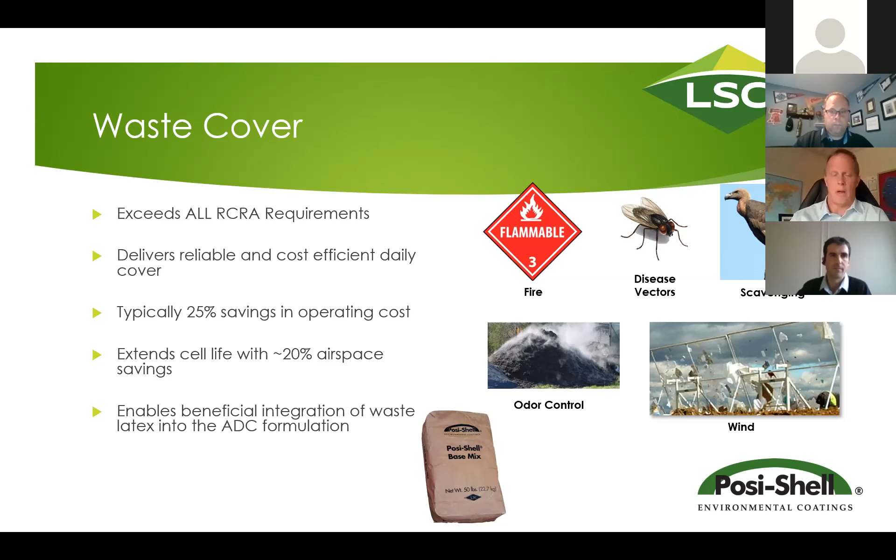It also has a lot of interesting benefits. We're creating a slurry on site, and many sites actually that collect waste latex paint will use that product in the Posi-Shell mixture as a way of recycling waste latex.

So that's typically the Posi-Shell for alternate daily cover. It's just going to be a product that comes in a bag. There's a piece of equipment on site, we mix this with water. It creates a very dense slurry that seals odors and also has a bit of odor filtration. The base chemistry or the base materials we use are very similar to materials used in kitty litter.

So from a technology standpoint, that's what's happening with our daily cover. Our daily cover products, we call them daily cover, but they could be out for longer than daily if required. However, we also, as you know, get into a lot of situations on a landfill, whether it's trash or soils that are very permeable, where odors are escaping in other situations.

So it's very simple with the Posi-Shell to alter the formulation to become much more durable than daily. We typically do this with something that's going to help harden the material. Most of the time, it's going to be a cement product.

So when we take Posi-Shell and add a durability enhancer, now we can make a coating that's going to last beyond a year with very minimal upkeep, very minimal maintenance.

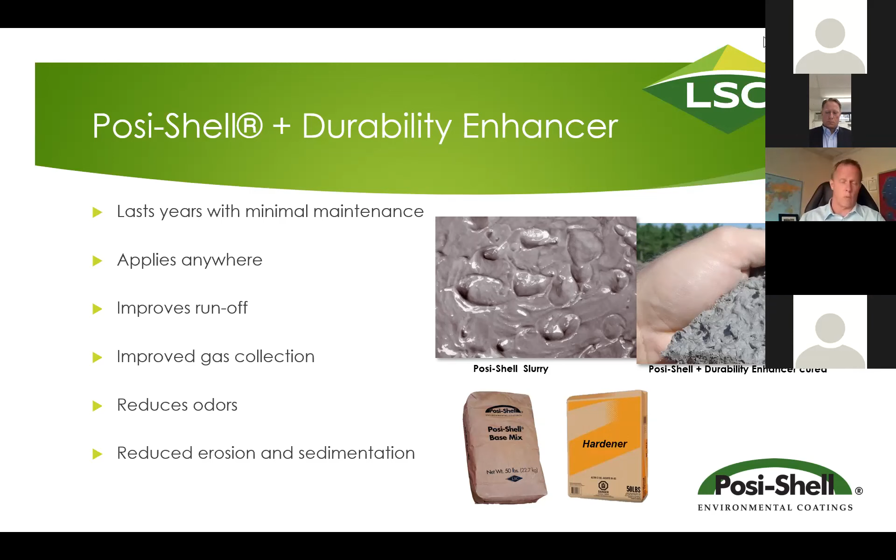The product improves runoff. We put a very thin coating of the material on various surfaces on a landfill, and in some cases we can now see rainwater come off at 95%. Water typically going into the landfill can be reduced dramatically. It's going to improve gas collection in situations where it allows you to suck on the gas system harder. Of course, it's going to reduce odors, and then it also is going to reduce erosion and sedimentation, keeping the soils where they belong.

So again, we have this daily cover version where every night, instead of using a 6-inch layer of soil, you can put Posi-Shell down. Then there's an intermediate version where, depending on the state and its requirements, we see intermediate cover ranging from 12 inches to 18 inches in some cases. And we have approvals in a number of states to replace some or all of those types of covers.

So again, we've been doing this for many years. And on the intermediate cover, very similarly, we can create a very durable product that can be out for a long time. There's airspace savings in intermediate cover as well. There's going to be all kinds of improvement with the gas and erosion and sedimentation in very dry climates, not so much maybe in New York State most of the time, but also windblown dust gets reduced dramatically.

We've already talked about the costs. One of the other really important things about Posi-Shell is when you need to move on to the next phase, whether that's hydroseeding or closure, the Posi-Shell doesn't have to be removed. It can simply be tracked in with a dozer. So if hydroseeding needs to occur on the slope, come in the following year and simply track over it. It's a mineral-based product that joins into the structure of the soil, and we have no issues whatsoever with vegetation growing with it.

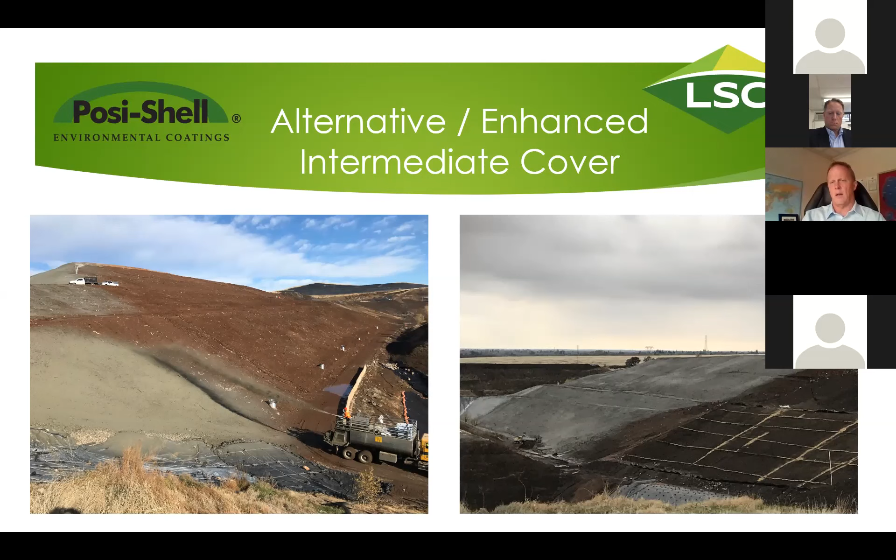So there are two types of intermediate cover in our opinion: what we've dubbed alternate intermediate cover and enhanced intermediate cover. Alternate intermediate cover is similar to alternate daily cover. These are situations where the product can be used completely in place of intermediate cover soils.

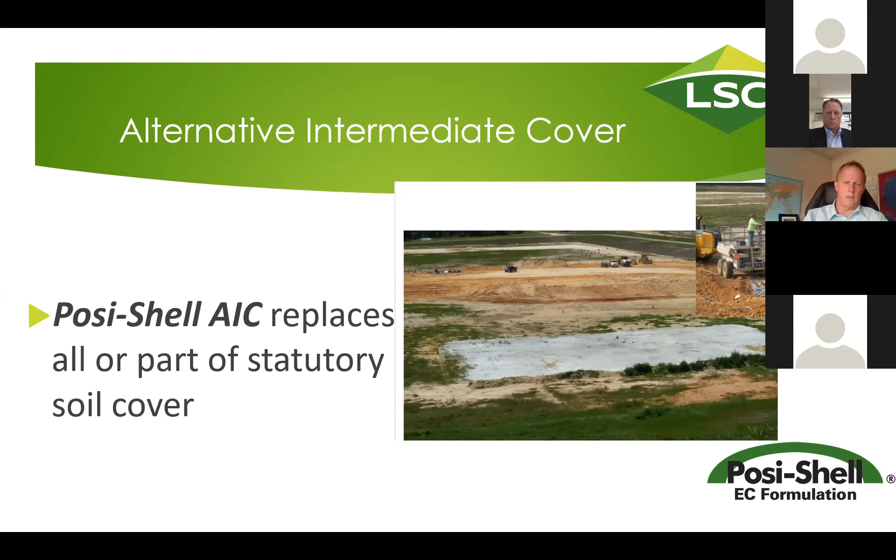We have approvals for this. This picture here is taken in Florida. We have approvals in South Carolina too, where the product can be left out much longer than overnight. It varies state to state - in some cases it's 30 days, some cases it's 180 days. We've had these things tested by third-party firms, and what they're checking for is what we're always looking for: odors, blowing litter. In the case of this one in Florida, there was a lot of work done on groundwater monitoring. We pass all these different tests. So that's alternate intermediate cover.

The other version is enhanced intermediate cover. This is where we're leaving the statutory intermediate cover in place, whether that's 12 inches or 18 inches - that varies. The reason we're doing this is we find throughout the country different types of soil structures. Poor soils in many places are very erodible from rainwater, and other soils are very permeable to gases escaping. Posi-Shell is used regularly and has been tested at many different sites, hundreds and hundreds of acres applied in this manner to help improve odor emissions at a landfill.

We take odor control very seriously because, in our opinion, a landfill manager has so many things they have to worry about every day, but to us, odors seem to be the top of that mountain. Where if odors cannot be controlled, these are the things we've seen shut landfills down, and none of us want that to happen. We put this slide in here because we take this very seriously.

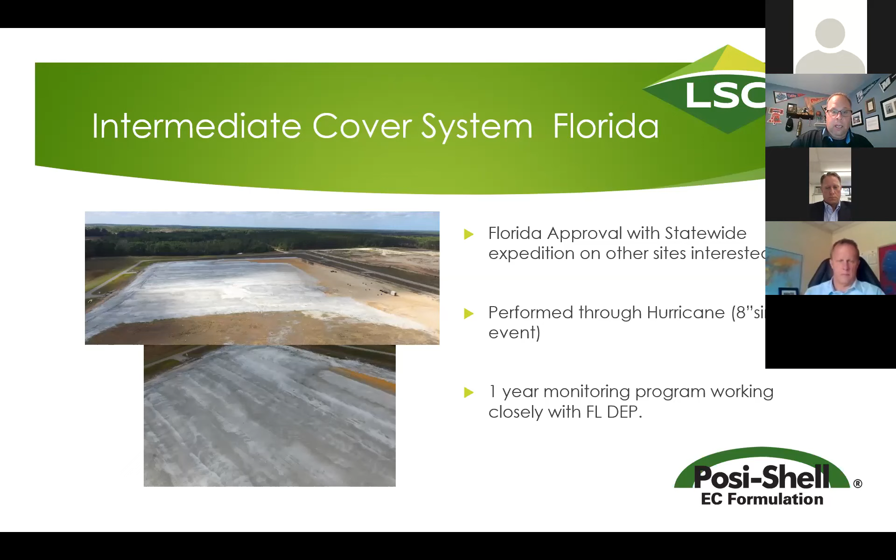Thank you, Joel. So what I'm going to do is go over three little projects and case studies that we've done using Posi-Shell for an intermediate cover / odor control application. Like Joel mentioned earlier, in the state of Florida we have preliminary approvals statewide - it's called an expeditious permit modification. We applied a little over 30, almost 30 acres so far at Hernando County.

Some of the bigger benefits, in our opinion, was the reduced leachate generation, because you're shedding that environmental load off instead of it permeating through and getting collected by your collection system. And then, as Joel mentioned earlier, the gas collection provides a much tighter seal and allows that landfill gas collection to draw a little more efficiently. Based on their third-party projections through their engineering firm, they were looking at a little over $10 million in savings over the project life.

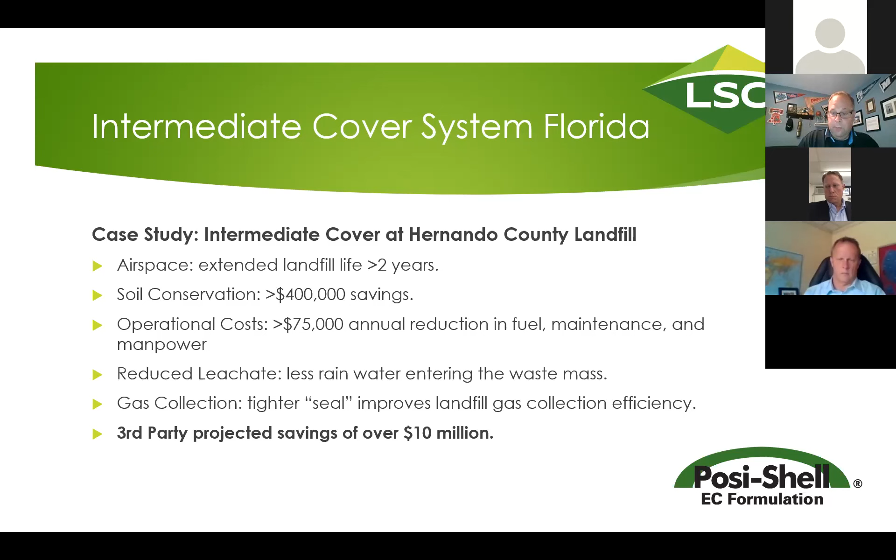Another pretty large project we worked on was a private facility in California, outside of Greater Los Angeles. They had some major issues with odor, and were looking for something to seal things in and stem that. Once again, very high permeability soil, and they were actually under a consent decree.

So what we did is a little over 37 acres at the time of the project since 2017, minimizing airborne dust where it was applied, particularly on the slope areas. And as I mentioned earlier, it improved the barrier against ambient air being drawn in. The other thing to keep in mind is that when you draw on that system a little harder and get ambient oxygen, it could lead to some combustion issues.

So that's another thing we found over the years, kind of an unintended benefit, is that you're allowed to draw a little more on that system without worrying about combustion issues. It provided an interim cover that's very easily integrated into the vegetative cover when it needs to be removed, versus the other option of putting a geotextile down and having to peel that back, which is very labor intensive.

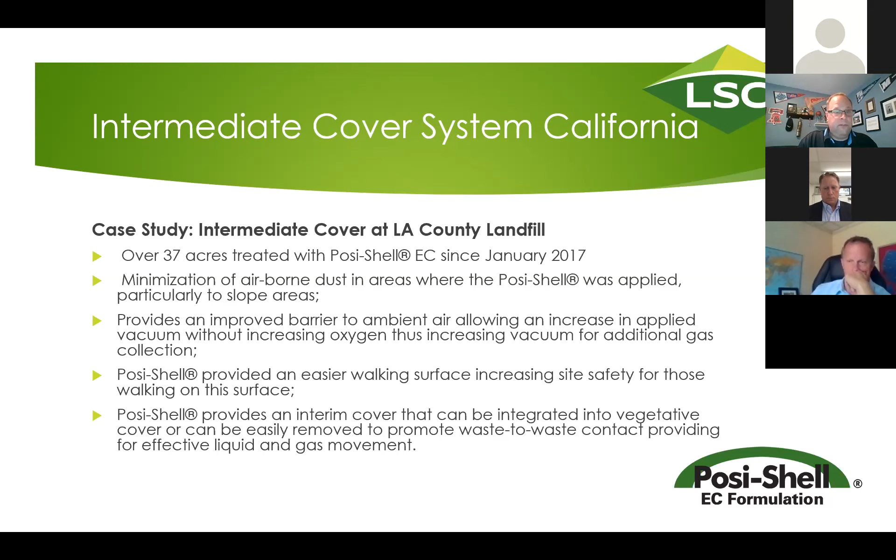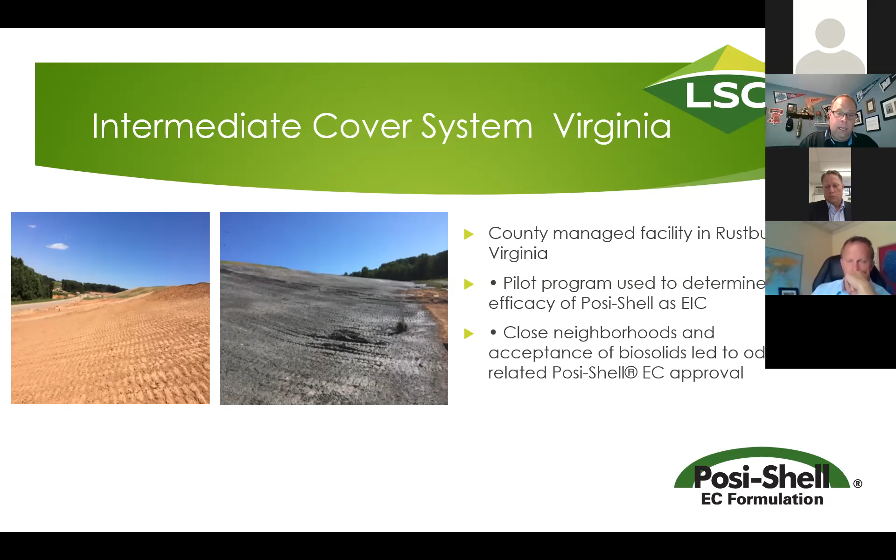One of the landfills I personally worked on was a facility outside of Rustburg, Virginia, near Lynchburg. This was a facility that didn't have an active gas collection system at the time, and they were getting some odor issues. So what we did is put a pretty robust formulation of Posi-Shell down, a little over 5 acres.

As we were putting this down, they actually installed 9 vertical wells and tied it together to a portable trailer-mounted gas collection system on a vacuum. They had their engineering firm monitor this very closely. The surface methane concentrations showed a little over a 20% reduction overall, and about a 44% reduction where the Posi-Shell was applied versus the control area that was not applied.

The surface H2S concentrations showed a little over 56% reduction, with a median reduction of 50% across all 9 wells. And of course, they had qualitative data that supported that information, and they've been very happy. Since then, they've actually upgraded their system to a more of a live system that's been installed. So the gist is: an improved gas extraction system will dramatically reduce odors.

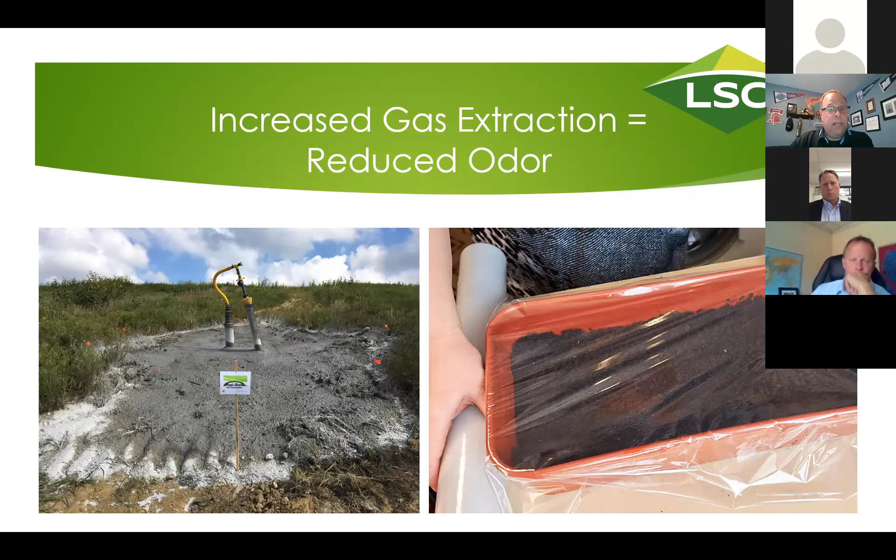Some other applications we're able to do are around wellheads. That's kind of a path of least resistance for the gas. We do a great job sealing everything in, but around the wellheads is usually an area where we start to see some hits. So a lot of our customers have sprayed this around their wellheads to seal things in. During independent testing we've been doing over the years, we see about a 93% reduction in VOCs in areas that have been applied with our product.

Hey Ben. Yes sir. Go back that one slide, just so the group, if you don't recognize that device, that's called a flux chamber. It's used for measuring odor emissions and VOC emissions out of a landfill, but this is a slope of a landfill.

Actually, this is in Hong Kong, and what they'll do is get a baseline reading on a slope that doesn't have the product on it, and then put it on the slope that does. This particular one is our Posi-Shell, and yeah, they see about a 93% difference in what's coming out there. The brown around it is just a wet Posi-Shell used to seal it off, so they make sure the emissions are only coming from underneath that device.

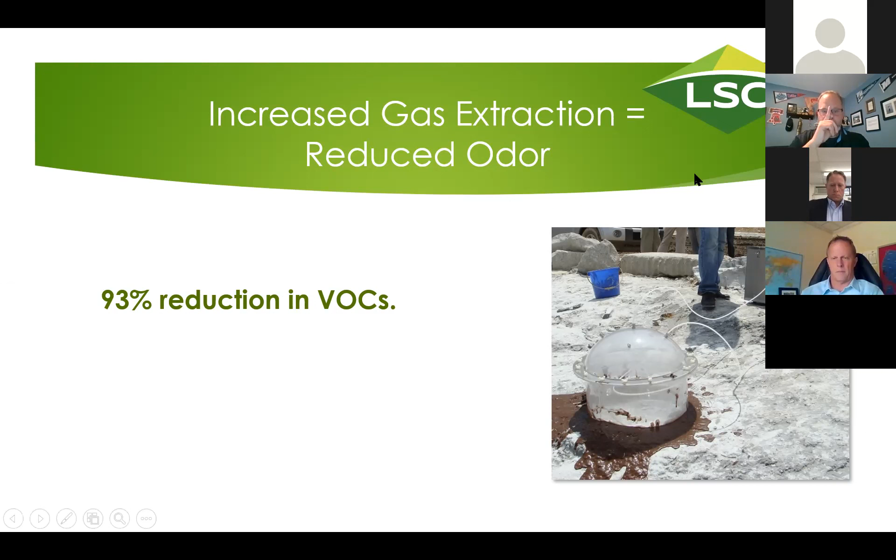The other thing I should have mentioned earlier is that there's always a concern when you're drawing in more ambient oxygen, especially if your system is like a gas to energy plant. You need to balance that oxygen, because when you draw a little harder, it can throw those numbers off a bit. There's a concern when they're at the actual plant about getting too much oxygen versus what they normally get. That's just another thing I should have thrown in there.

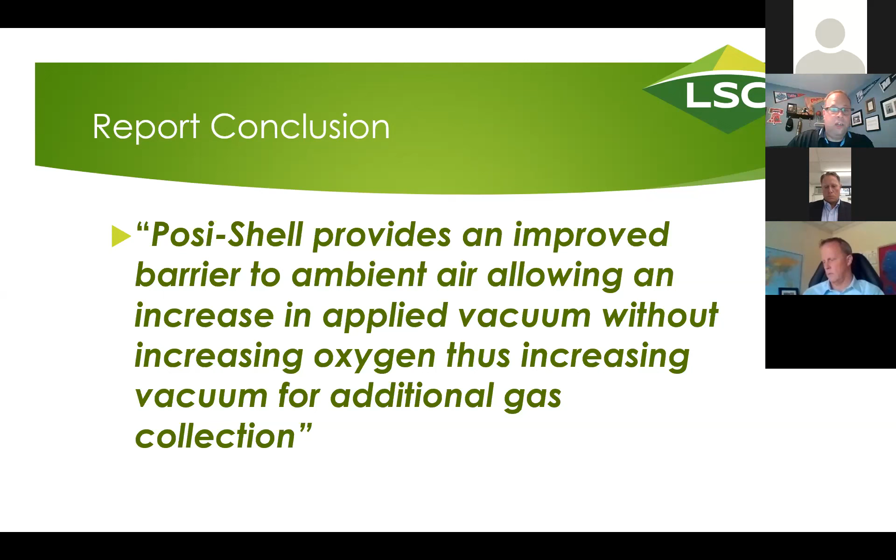Some other pictures of facilities where we sprayed around the wellheads. Some of the testing we've done: well 1 is applied with Posi-Shell, and well 2 in red is bare soil. Over time you'll see a pretty dramatic decrease in emissions where we apply the EC4 Posi-Shell around the wellheads versus the bare soil.

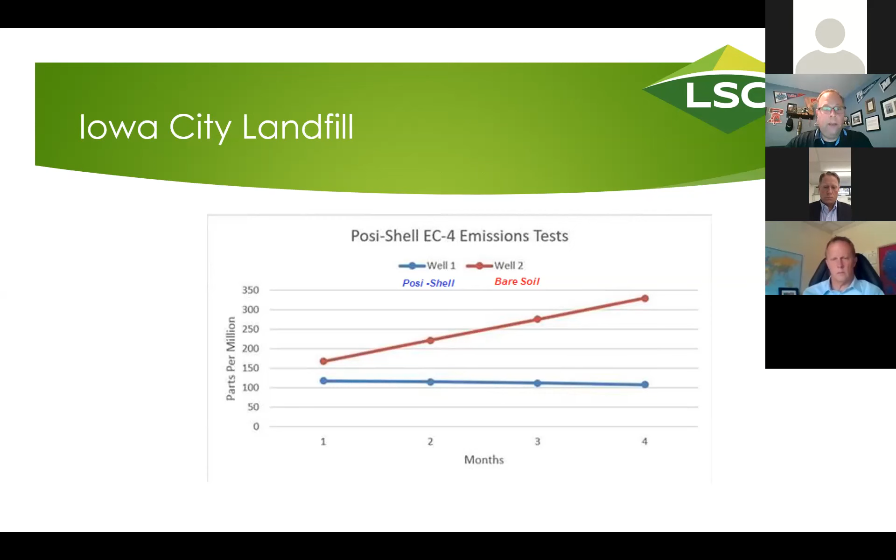Another thing I want to mention is we have another standalone product called Odor-Shell. It's a variation of Posi-Shell with very highly concentrated odor counteractants in it. We leverage a 3-pronged approach of sealing, filtering, and neutralizing odors on contact, mainly used on piles of special waste and working face odors way above and beyond what we'd consider normal. Not necessarily great for slopes -- that's more of our EC formulation -- but wanted to throw that out there for working face odors and special waste odors.

Like I said, it's a variation of our Posi-Shell product infused with neutralizers. It adheres to any surface in wet or cured form. We can also mix in a durability enhancer to extend that somewhat and give you up to a year of performance.

So this is a slide of some of the testing we've done, like Joel mentioned earlier, with our flux chamber testing. We usually see anywhere between 93 to 98% reduction in VOCs.

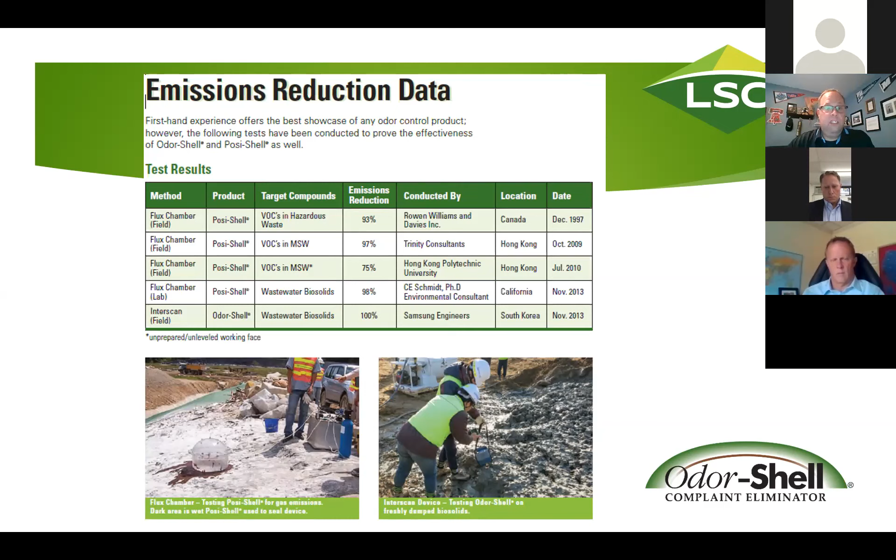So I'm going to turn this back over to Joel to talk a little bit about our solar spark vent flares. How much time do we have left? This is our last piece, but just give me an idea -- 5 minutes. Okay, so we'll just go through this rapidly.

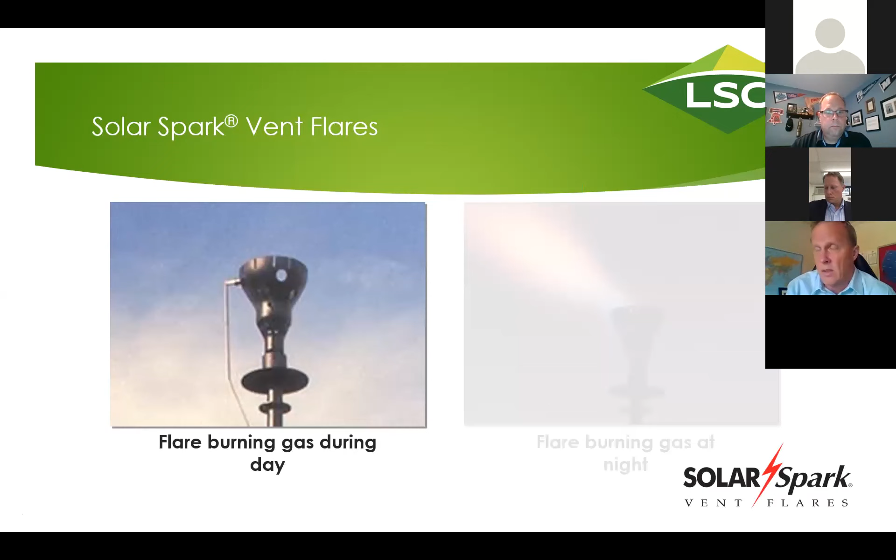Talking about landfill odors -- my long experience doing this is I've always told people, if I can smell the landfill a mile away when I'm driving up to it, and we've all run into cases like that, that's gas. The odor is going to emit from a couple places: the working face, and gas emitting that's not being collected or destroyed properly. My experience is these gas odors are going to be the ones that travel much further. The working face odors, to me, don't travel that far.

So if you have a good source of covering the working face, you're going to take care of that. However, landfill gas is going to come out of the landfill somehow. And I get passionate about this because I don't care what you cover the landfill with, the gas is going to come out. So we developed many years ago a product that frankly we thought would eventually go away.

So we have these solar spark vent flares. They're designed to be placed on the vent. We'll show you some pictures a little later showing they can actually be installed just about anywhere, in the face of active gas systems and waste to energy plants, which we think is a great thing. We thought these flares would see their day 20 years ago and then they would go away. However, we still place a lot of these flares because what we've learned is gas in landfills can be very tricky.

And frankly, it's a massive odor source. So where we find ourselves placing these flares is: number one, in situations where gas collection is not economically feasible; number two, where a gas collection system might not be completely connected; and number three, where a gas system might not be functioning properly.

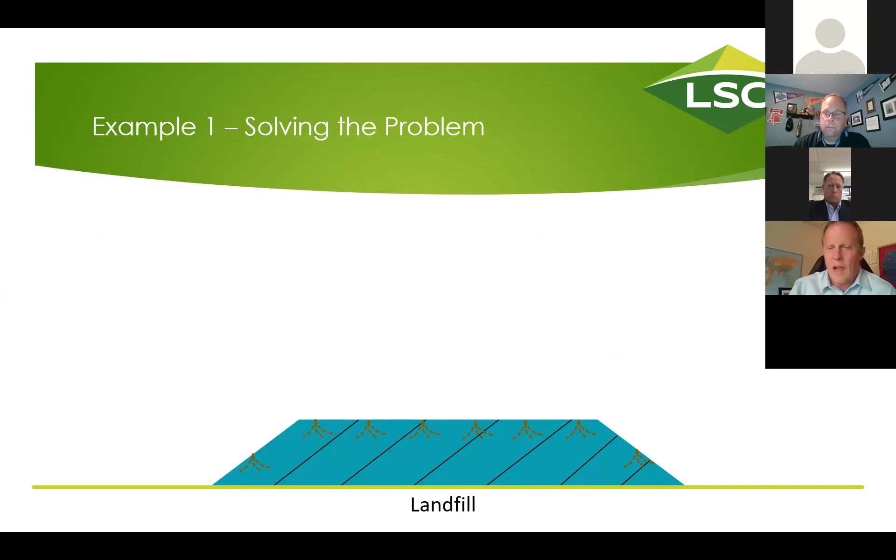These slides were made for a presentation we did in Asia, so the graphics here are designed the way they are because I knew we were dealing with a bit of a language barrier.

So the first situation here is solving the problem where a gas system might not be feasible. We have many customers that just place these solar spark vent flares on the wells that are in place. They can be installed in an hour, they're very economical, and they're rated at 98% efficiency. The design of the flare head you saw earlier was developed at the City of Albany landfill many years ago. They function in wind. The sparking system, if it happens to go out, which happens very rarely, it's on a constant solar spark.

So they're very reliable, there's thousands of these flares throughout the world. So we have the situation where an active gas system might not be feasible.

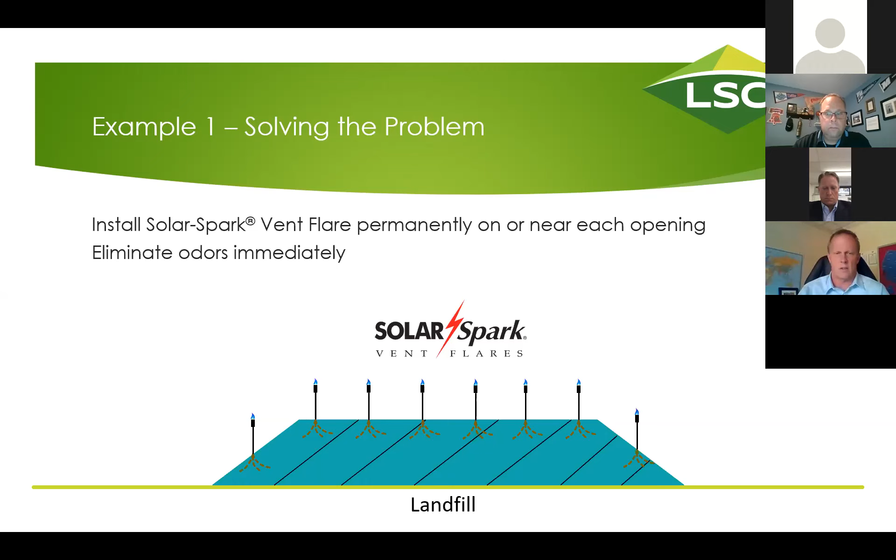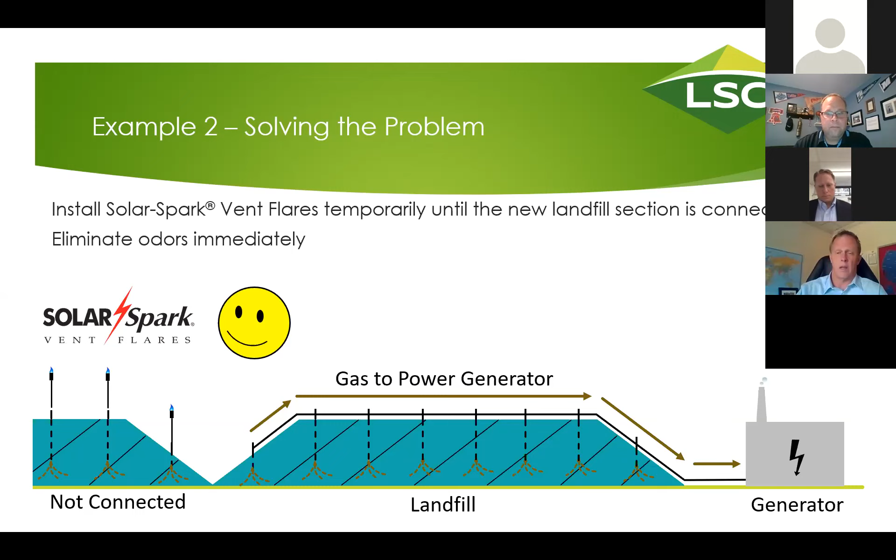That was for international. So in other situations, there's possibly a system where there is an active gas system, waste to energy, but what we've run into many times is parts of the system aren't connected. The picture you'll see here in a moment is from a large customer operated by Veolia in Hong Kong. They have active gas collection, but they don't drill the vertical wells until the new cell is completed. So what they've done is placed our flares on the wells, and they have flares they can move around in the current cell until it's connected.

So again, they're able to destroy the gas and destroy the odors. This is a picture at a very large facility in Hong Kong. We took this at night intentionally - there's 100,000 people in those 54-story apartment buildings looking down on this landfill. So they're very serious about odor control there, and they utilize these flares regularly.

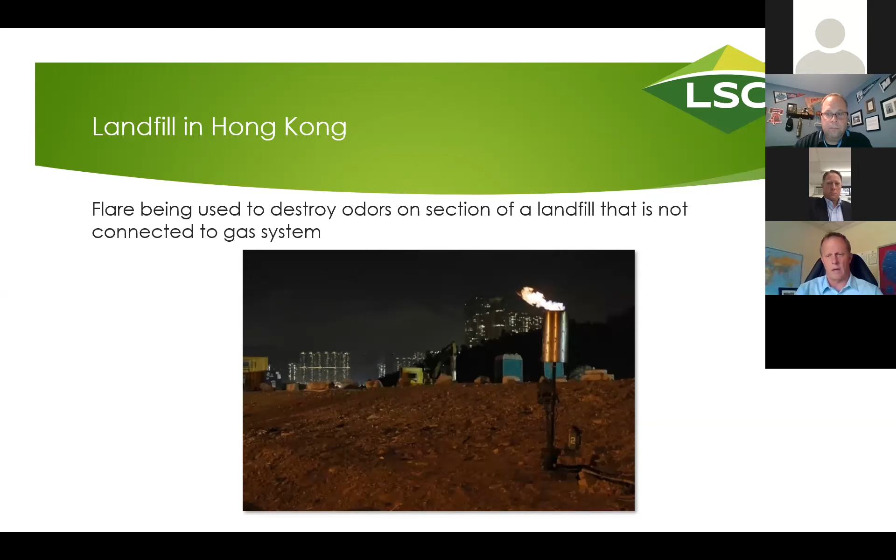And then the last scenario, which happens fairly regularly actually in Asia, is where the monsoon rains come and people have a gas system in place. However, the landfill gets too much water in it, and the wells don't work properly because they get blocked and watered out. So what happens in cases like this is, again, we've been able to help people install these flares.

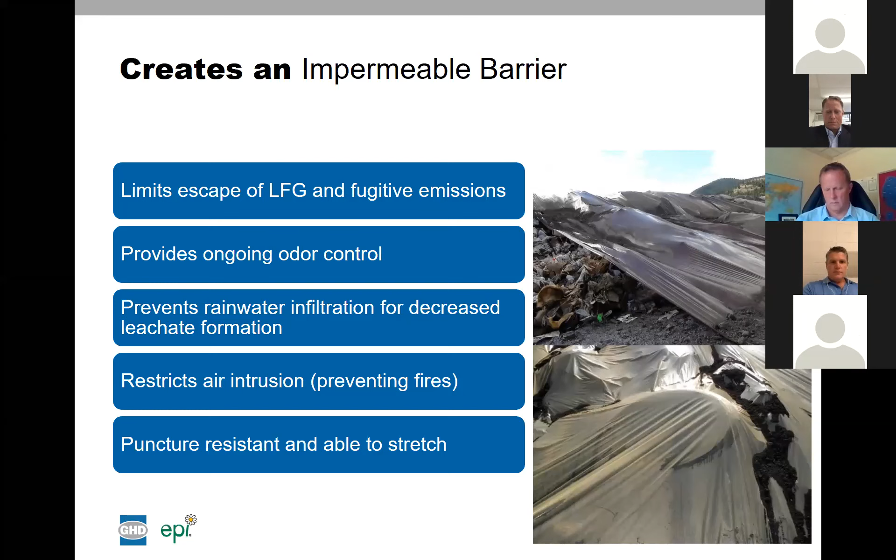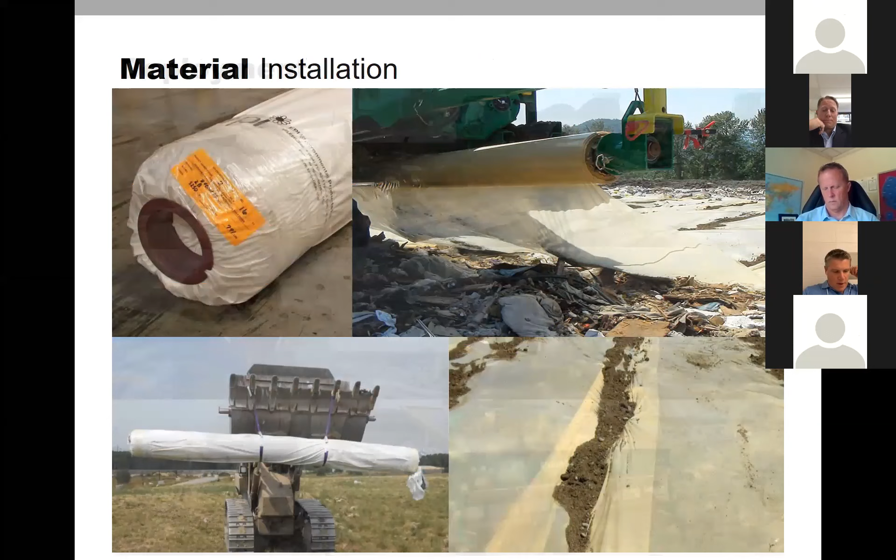It also limits the escape of landfill gas and fugitive emissions, provides ongoing odor control, prevents rainwater infiltration as we discussed, and also restricts air intrusion - so you don't get any oxygen in. If you have a fire or something smoldering, it'll help smother that out. It's puncture resistant and also stretches over odd-sized items in the landfill as you cover.

As far as the material and installation goes, we discussed the film itself. It comes on a roll, 18 foot wide, covering approximately 93,500 square feet of area. You do have to account for about a 10% overlap, so you back 10% out of that 93,500, and that'll give you the square footage coverage.

As we discussed, there are basically 3 different types of deployment devices. The flagship deployer is the ECD-800, a self-propelled rubber track unit. It utilizes a Morooka, which if you're familiar with that in the landfill industry, a lot of times Morookas are utilized as dump trucks to get in and out of soft areas. So it has really low ground pressure, and that allows it to operate over the top of the waste effectively.

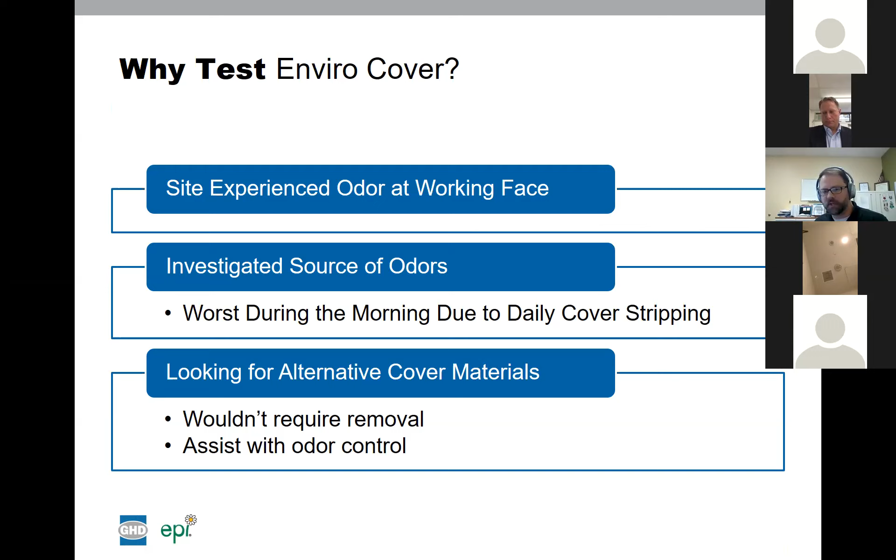One of the findings was that the odors at the working face were strongest in the morning. After more discussion, the odors were determined to be due to the process of stripping the daily soil cover and exposing the waste from the previous day. This finding caused the site to look into what sort of ADC materials might exist that wouldn't require removal every morning and could assist with controlling the odors at the working face.

So next we'll discuss the types of materials that were researched. The client reviewed and tested various soil cover types to see if they had any effect on odors. However, this was not an ideal solution as it didn't really provide an advantage. Operations would still need to perform soil stripping to start each day.

Next, they looked into traditional tarps. These tarps had the benefits of being easily installed, typically worked in all weather conditions, and controlled litter and vectors. However, they did not really assist with the site's odor issues.

Another approach they researched was spray-on cover applications. After speaking with some of the operators, they explained that they generally found it difficult to get adequate coverage over the entire working face, and that the application didn't consistently work well under all weather conditions, especially during periods that were particularly cold or wet.

And the last option was EnviroCover, which we'll discuss more.

So based on the information supplied by EPI to the client, EnviroCover sounded like a potential solution for the site. A big selling point was that removal of the application was not required, so the material would be mechanically destroyed on the subsequent placement of waste. Therefore, it would not impede the movement of landfill gas or any leachate.

However, the site wanted to make sure that they weren't creating any other issues by introducing impermeable layers within the waste. The material is resistant to tearing and puncturing as it has high tensile strength and elongation, but it needed to function as designed under typical working face conditions, which can vary on a daily basis.

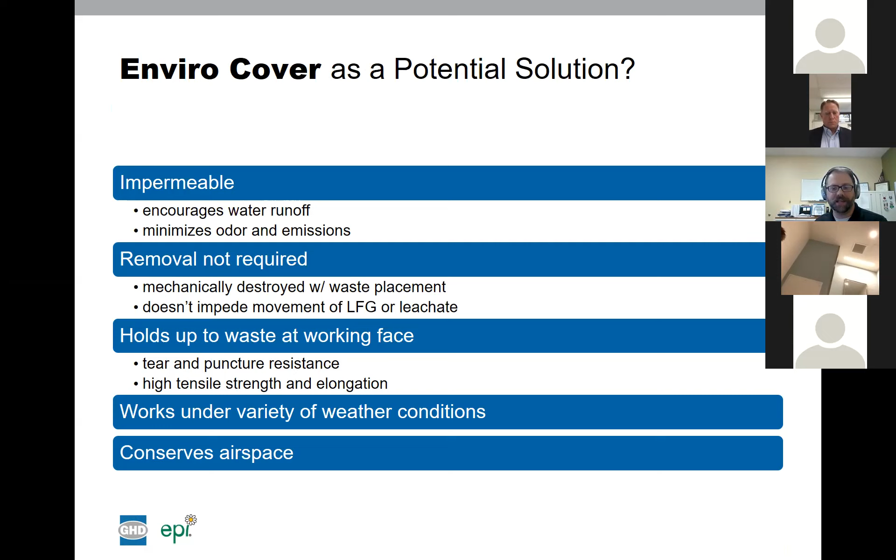So after considering all of EnviroCover's details, the site wanted to conduct a pilot test to make sure that the product would work as planned.

The site submitted an application to the state regulators to conduct initial pilot testing in December 2018. The state was intrigued by the technology and its ability to potentially reduce odors, so it was approved initially for a 30-day trial period.

EPI made sure to be on site for the study in order to assist in any way possible. After all, it was a new type of cover system for the client, so they really wanted to make sure that they got a good sense of the product and that it was being implemented properly.

The client worked with EPI and was able to rent the equipment from them for the pilot test. This allowed the client to spend a limited upfront cost other than the cost of the actual material being used. And it should be noted that while cost is obviously a factor and was a consideration by the facility, cost consideration is not something that was included as part of this evaluation.

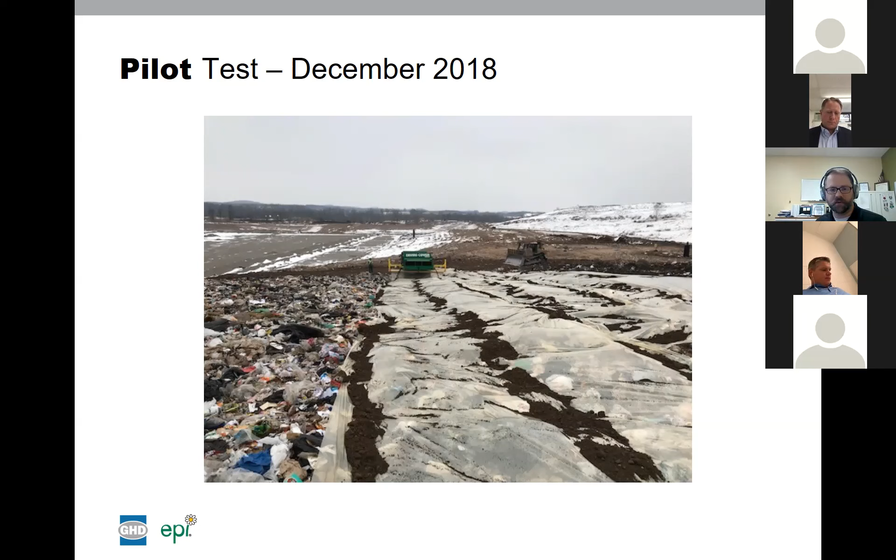So as you can see here, here's some of the pictures from the initial pilot test in the winter of December 2018 and January 2019. The EnviroCover is in place and ballasted along the edges by soil.

Throughout the initial pilot testing, the study was subject to several different weather conditions, including both wet and snowy weather, extreme cold, and windy weather. As advertised, the material could be deployed under these harsh weather conditions and stayed in place as planned.

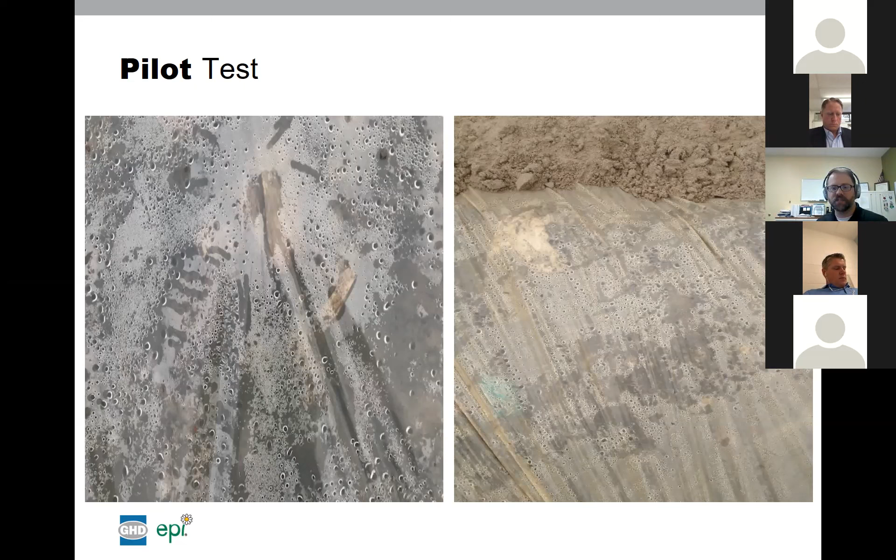It should be noted that surface emission monitoring of the working face was not performed as part of this case study. Therefore, while there was anecdotal evidence in the reduction of emissions through observations made, no actual testing was performed to confirm this.

Odor intensity is determined using ASTM E544. Odor intensity refers to the overall strength of the perceived odor. The more intense the odor, the more likely an individual will react negatively to it.

Even pleasant odors can be too much at high intensities, and conversely, offensive odors can be very annoying at low intensities. A common example is when someone is wearing an excessive amount of cologne or perfume. Typically those are pleasant smells, but in those cases it becomes just way too intense for any person.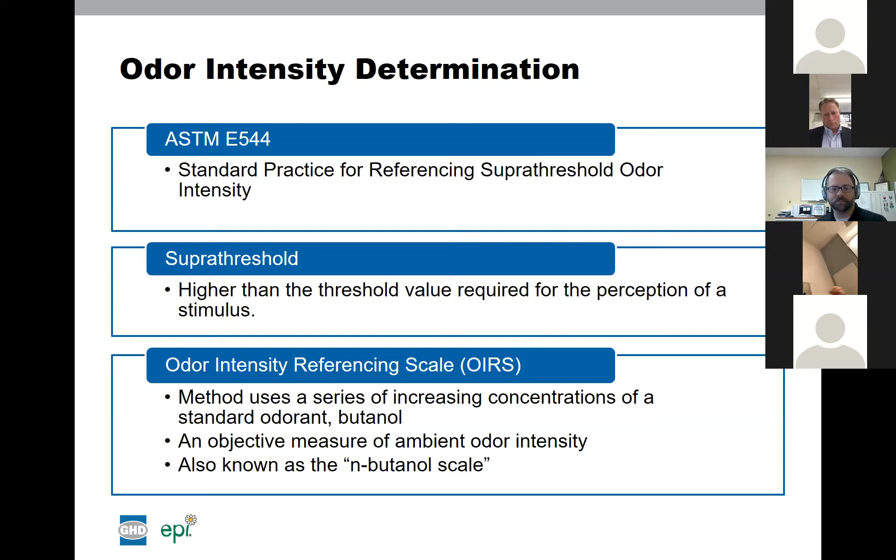When performing an odor intensity test, the field observation is expressed in parts per million of N-butanol, hence the informal designation of this as the N-butanol scale. This scale helps classify odor into levels of intensity ranging from 0 to 8.

For this study, site personnel were trained, as well as myself, two other members of GHD, personnel from another consulting firm, and even some members of a local community group.

Not all the smells they tested us with were pleasant or on the lower end of the scale. I secretly think they enjoyed watching us wince and gasp for air while we were being trained. But after taking the training and performing some assessments, it was impressive how a group of people with varying degrees of sense of smell could end up determining reasonably similar results.

As part of a larger effort related to odor assessment and mitigation, personnel were on site to perform odor intensity readings in January 2019.

The evening prior to the odor intensity testing, only part of the working face was covered using EnviroCover, while the remaining area was covered with soil. This allowed the two areas to be compared the next morning.

Prior to starting operations that morning, odor intensity readings were taken. For the area where soil cover was placed, personnel determined that readings ranged from 0.5 to 1.0. In the area of the EnviroCover, only a trace odor was perceptible to the personnel present.

As a check, an 8 by 10 foot section of the EnviroCover was cut open in order to perform a reading. Immediately, the odor intensity spiked from trace amounts to 1.0. After 15 minutes, the intensity backed down to 0.5, and then returned to similarly background intensity shortly thereafter as the odor dissipated. Due to these results, it was concluded that EnviroCover does have an ability to limit odors and likely any associated fugitive emissions.

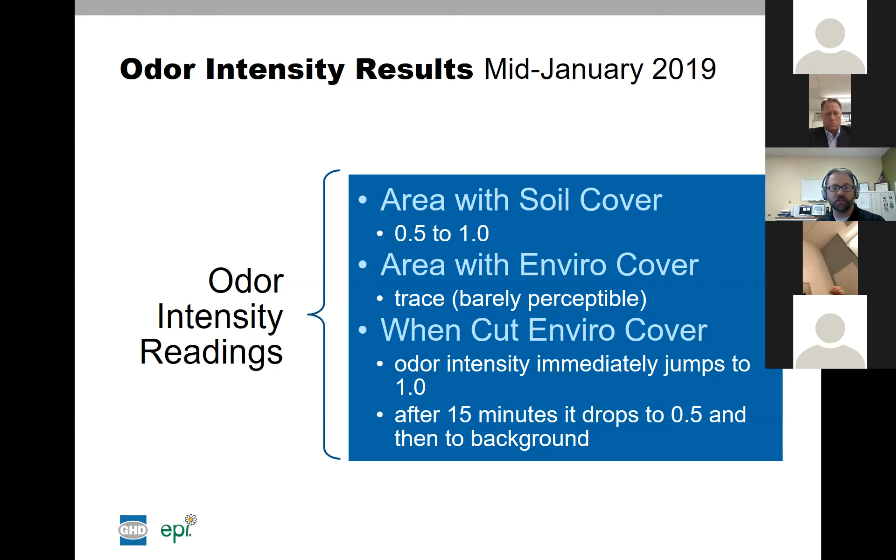Based on the initial results, the site wanted to extend the trial period to be sure they considered performance during seasonal variations and long-term operational aspects. The state regulators also wanted to get a chance to see it in use and evaluate the effect on odor control over a longer period.

They also wanted to see if use of the material had any impact on the number of odor complaints received. Therefore, the initial pilot test was extended from 30 days to 6 months. Due to the fact that the findings from the pilot test were promising, the site submitted an application for EnviroCover to be added to their approved list of ADCs, and that was approved by the state. The site has been using the material as part of their regular operations, and the results have been positive.

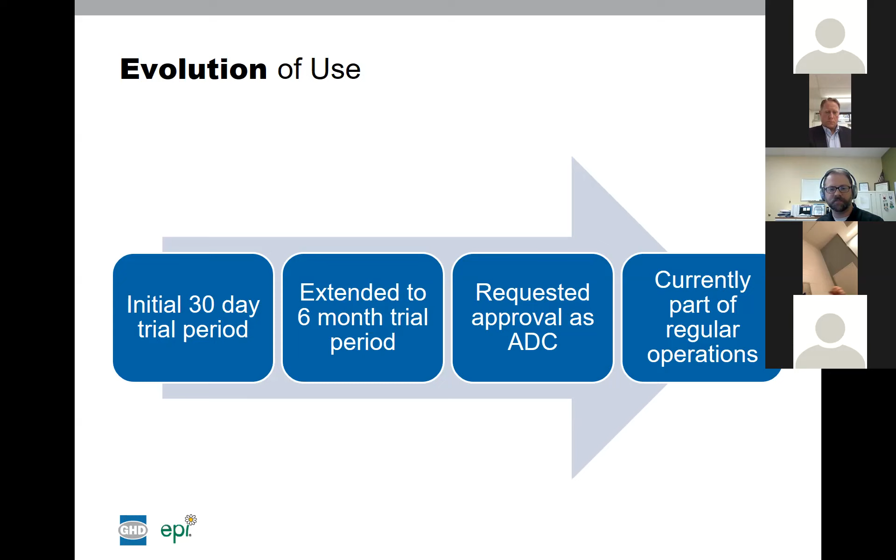Some takeaways: unfortunately, we are not aware of any single cover system that will work best for every application. If you have an operational issue, we recommend researching potential ADC applications that may be able to assist your facility. This will allow you to determine what works best for you.

Keep in mind that what works at one site, or what one operator may really like and prefer, may not be the best application for your site. I will say though that most vendors are completely willing to help you test their material at your site, by either renting the equipment to you or something similar, to make sure it will perform up to your expectations.

Sometimes the products do really work as well as advertised and can be part of the solution for those hard to solve operational issues. This is especially the case if odors due to cover stripping are an issue at your site. If so, EnviroCover may be a good alternative to typical cover materials, considering it performed positively during our study.

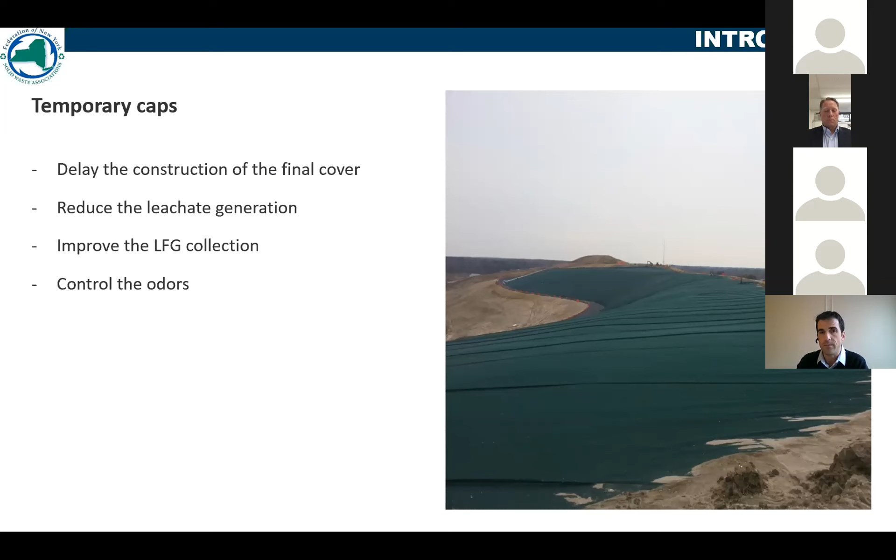The issues you may have with temporary caps is the ballast of the exposed geomembrane. If the geomembrane is not well ballasted, you may have uplift. The traditional way to ballast the geomembrane is to put a lot of sandbags to maintain it in place, and Elliot will show you an enhanced way to ballast the geomembrane and get rid of the sandbags.

On my part, I will talk about a second issue you may have with temporary caps: the efficient collection of the LFG.

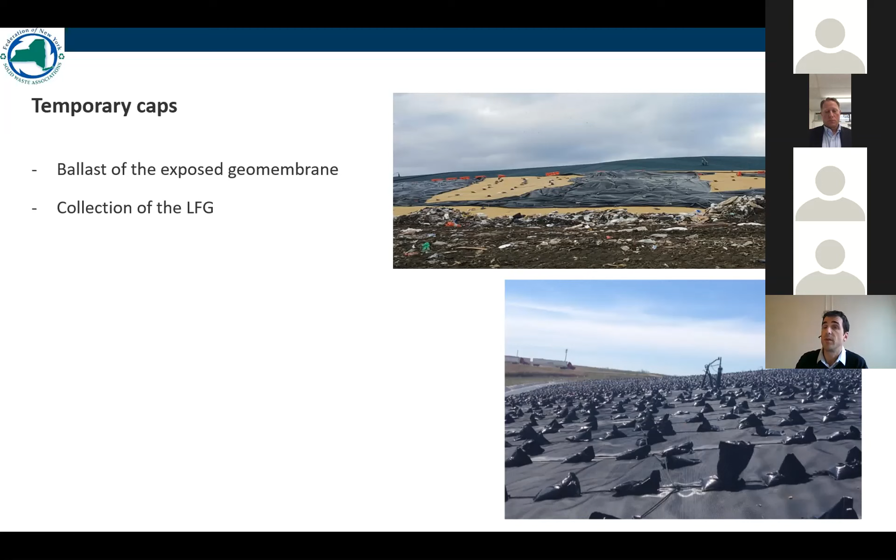Most of the time, you will have perforated pipes under the geomembrane, placed every 30-40 feet, and you may not be able to catch all the LFG with that system. So first, let me introduce a way to collect the LFG under the geomembrane using a multilinear drainage geocomposite.

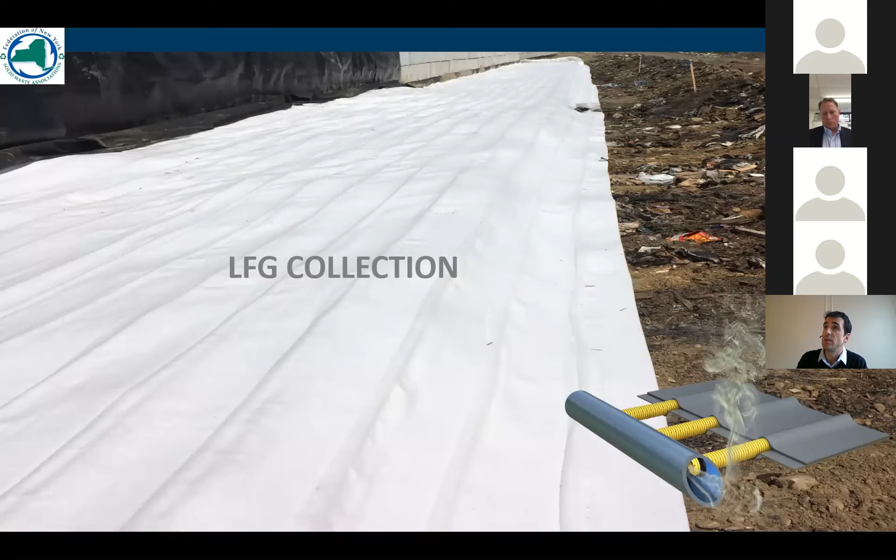The multilinear drainage geocomposite is a drainage geocomposite with drainage conduits regularly spaced between two geotextiles. In our case, the drainage conduits are perforated polypropylene mini pipes.

They are placed in the product every 10, 20, 40, or 80 inches depending on the flow capacity you need, and the diameter of the mini pipe may be 20 or 25 millimeters. The product is delivered in rolls, 13.1 feet wide, 246 feet long.

We can play with the spacing of the mini pipes, and the geotextile layers can go from 4 ounces per square yard to 60 ounces per square yard if you need a product with really high mechanical properties. It is used for water drainage, leachate collection, and in our case for gas collection.

The main advantage of the product is that the mini pipes have high compressive resistance. The pipe stiffness at 5% deflection is over 435 psi. The transmissivity of the product, depending on the number of mini pipes, can reach 4 × 10⁻³.

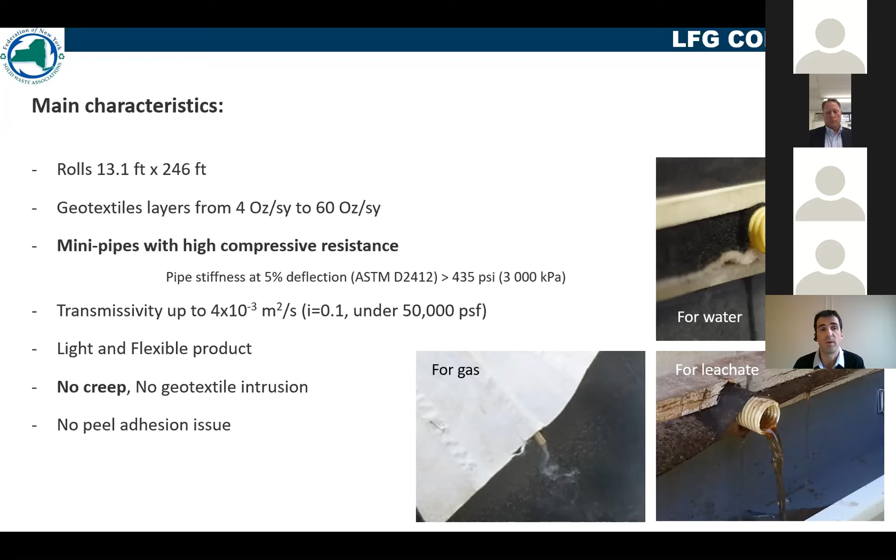Even though the product is light and flexible, it will keep its drainage capacity over time, because it won't suffer creep in compression nor geotextile intrusion.

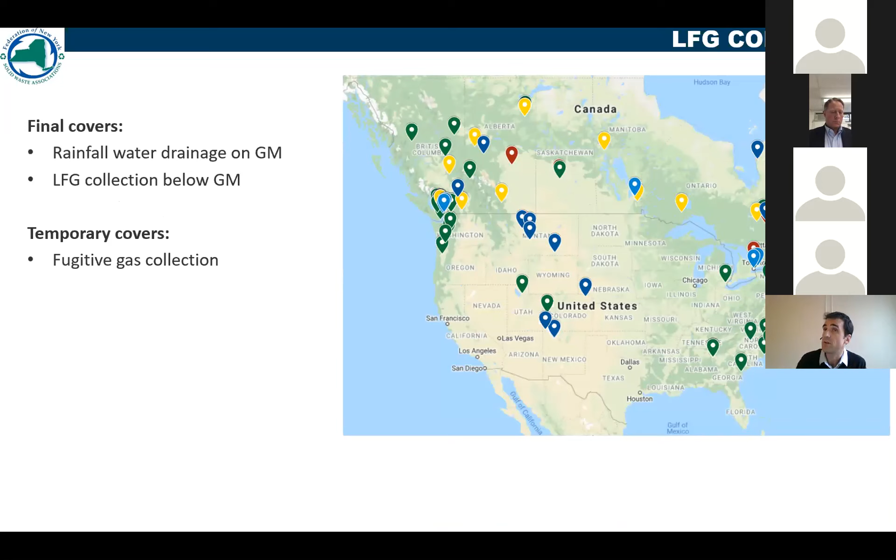It is used in North America for water drainage on geomembranes and LFG collection below the geomembrane for final covers, and for fugitive gas collection on temporary covers—we'll go into that just after. It's also used in the waste mass for horizontal LFG collection, intermediate leachate drainage, and at the bottom of the cell for primary and secondary leachate collection systems, and for water suppression systems.

The installation of the product is quite simple, almost like a geotextile. Between two rolls, you will have an overlap, depending on the position and exposure of the drain tube. You may use welds between the rolls or sewing, but for a temporary cover under a geomembrane, a simple overlap is sometimes sufficient. For end-to-end connections, you connect the mini pipes together using couplers provided in the rolls.

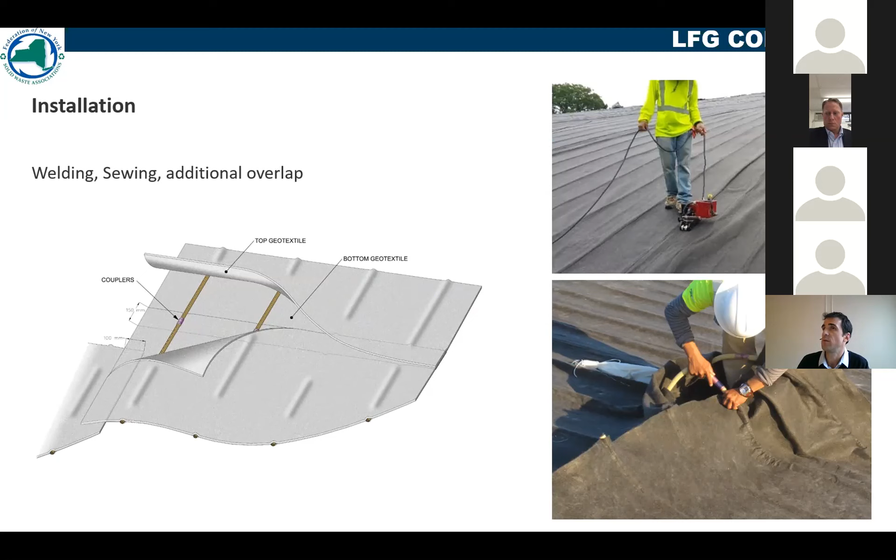The main point of using that type of product for LFG collection is that you can actually connect each mini pipe of the product to the main header pipe using a quick connect system. The quick connect system is nitrile grommets, and in fact you drill the hole in the main header pipe, connect these grommets, and after that you insert the mini pipe into these grommets.

You can see on the picture that you need to protect the mini pipes from the surrounding soil, because they are perforated, and so you want to prevent any soil particle going into the mini pipes. So you need to protect them with the geotextile layers of the product.

Here are some typical cross sections of the connection of the mini pipe to a main header pipe. You can have a simple connection or a double connection, depending on the position of the header pipe into the system. The connection is really just a mechanical connection. There is no glue to add, no weld to do. It is just mechanical.

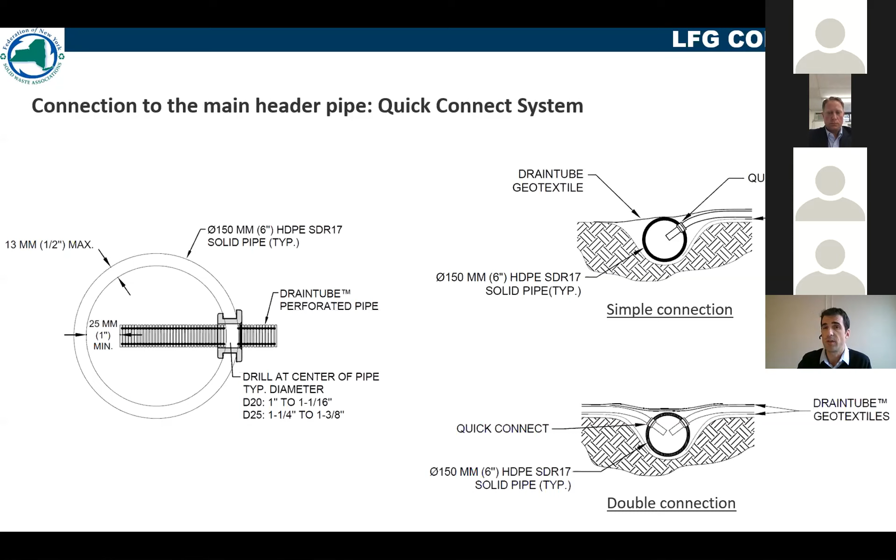As you can see in this picture, one issue you might have using this type of connection on the side of the temporary cover is that you may have some air intrusion into the system due to the perforated mini pipe, just on the side of the temporary covers, so just on the side of the geomembrane.

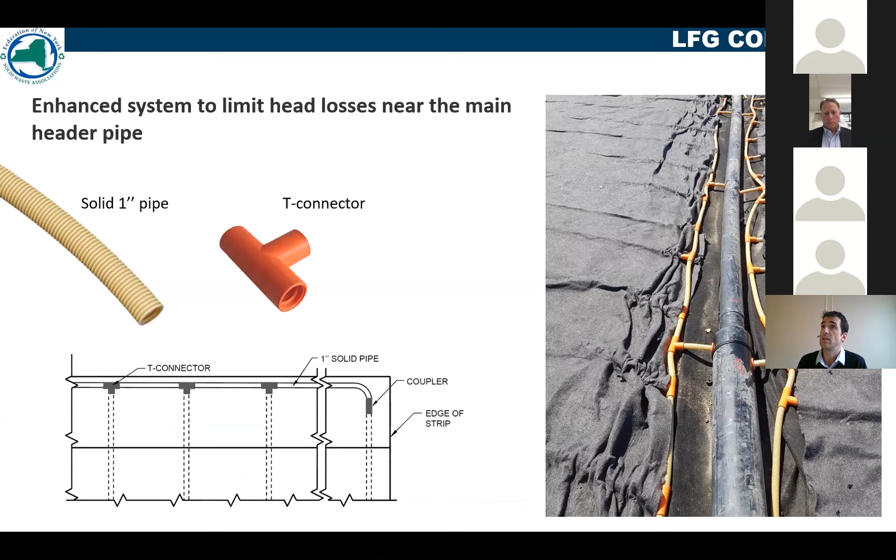To prevent that, we developed other tools that are solid 1-inch pipe and T-connectors. These tools permit limiting the head losses near the main header pipe. How do they do that? It is because the T-connectors reduce the number of penetrations needed into the main header pipe. You can see here on the picture that you have 4 pipes going into just one mini pipe, which will be connected to the main header pipe.

This last mini pipe is a solid mini pipe. So for the last 3 to 5 feet, you have solid mini pipes, and so you will limit the air intrusion into the system, even if you are on the side of the temporary cover.

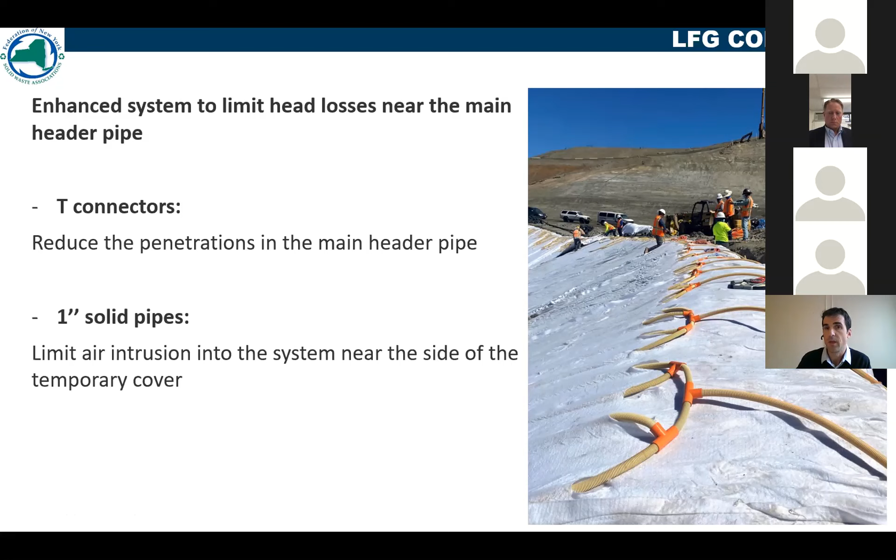The main advantage of that system over a perforated pipe is that it is easy to install. It's just rolls to deploy, and there is no pipe welding to do. All the connections are mechanical connections.

In terms of performance, compared to a 6-inch perforated pipe, you will have a greater zone of influence, basically because strips are 13.1 feet wide, and you have the possibility, instead of putting only strips of product, to cover the entire area of the temporary cover. Also, because of the shape of the mini pipes, and having a lot of mini pipes instead of one big pipe, you have less vacuum dissipation compared to a 6-inch diameter pipe.

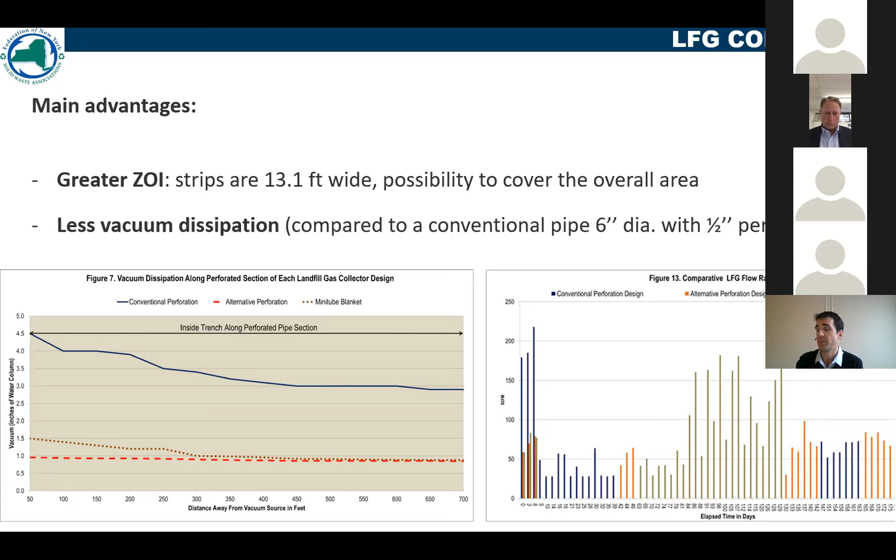One of the last advantages of the product is that it will keep its collection capacity, its drainage capacity over time and under load. Tests have been carried out with a multilinear drainage composite under 50,000 PSF, the product being placed between a geomembrane and sand. You can see that even after 1,000 hours under those conditions, the product keeps its transmissivity constant, meaning that the long-term drainage capacity or collection capacity of the product will remain.

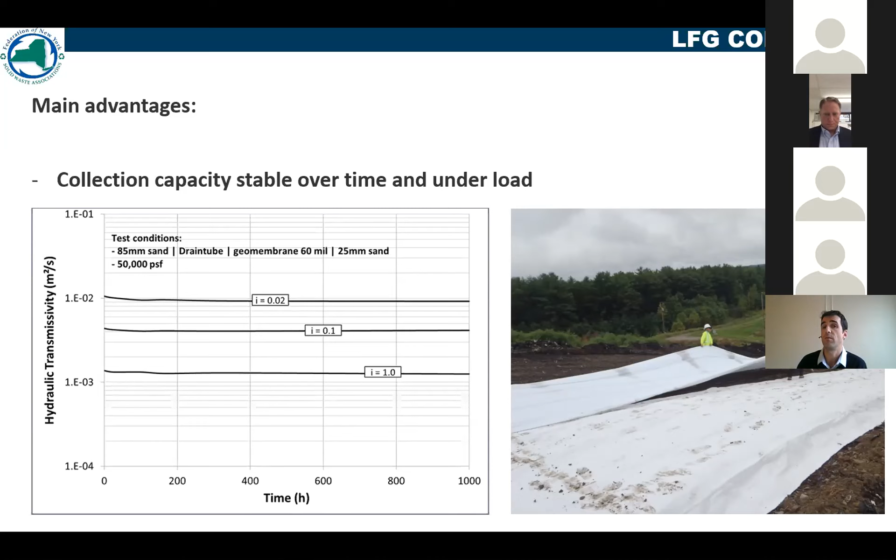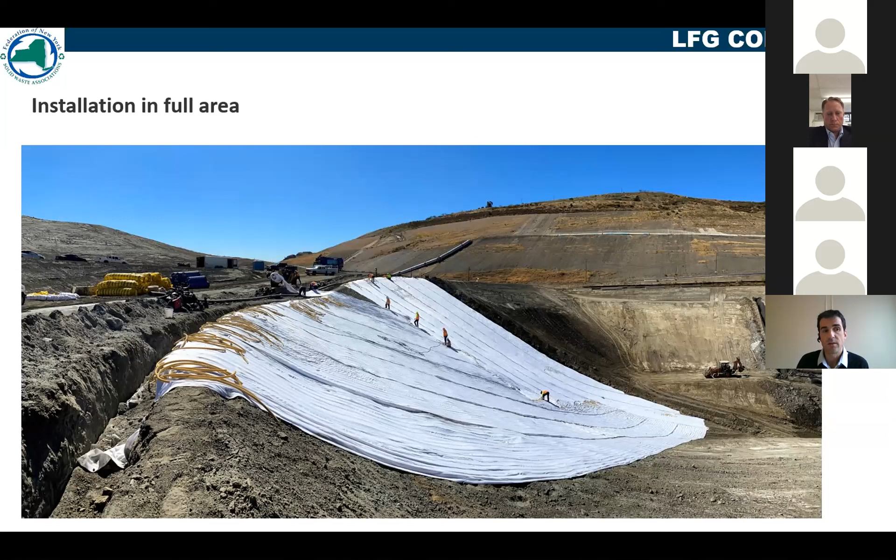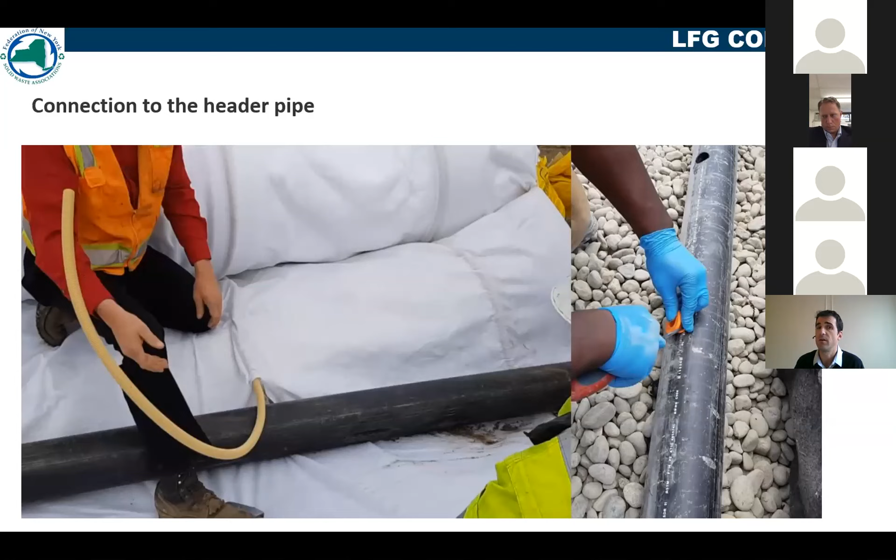Some pictures of the installation of the drain tube, first in strips, then in full area, and details of the connection of the mini pipe to the main header pipe using the quick connect system. After placing the drain tube, you will install the geomembrane directly on top, and then the ballast system that Elliot will talk about.

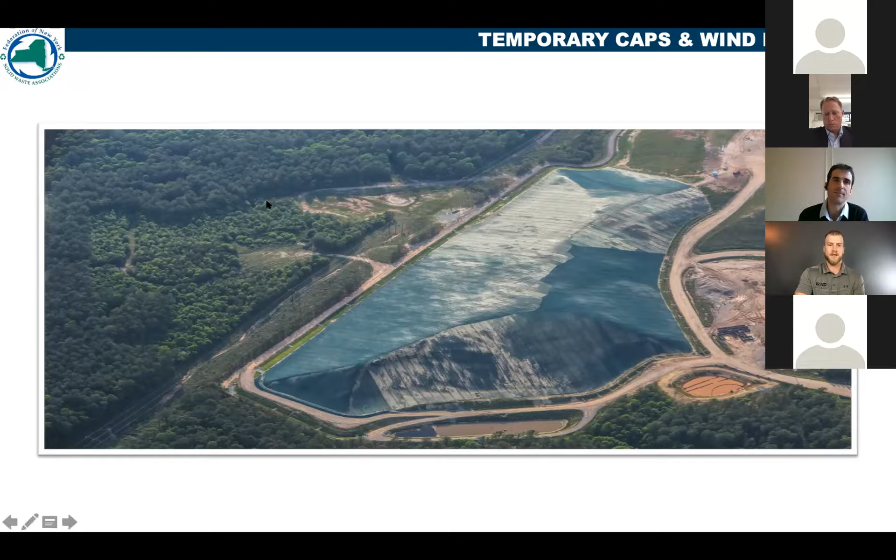So before I get into it any further, who is Wind Defender? What are we? We're a geosynthetics distribution company. We started the company in 2014, and our focus outside of just Wind Defender is also providing a variety of geosynthetic products, from liner to textiles to drain tube to rope and sandbags to sewing thread. We really are kind of a one-stop shop for a lot of the geosynthetic needs.

With the Wind Defender product, we really see it used in 3 different applications. They're going to either be used in your cell rain cover applications, which usually utilize an 8 mil Durascrim geomembrane as well as our Wind Defender ballast system. We'll see it in the temporary or interim covers, which is what the presentation is focused on today, used on anything from 12 mil and up to 60 mil, textured, non-textured, anything. And then as well as stockpile covers, where again we do a lot with 8 to 12 mil membranes.

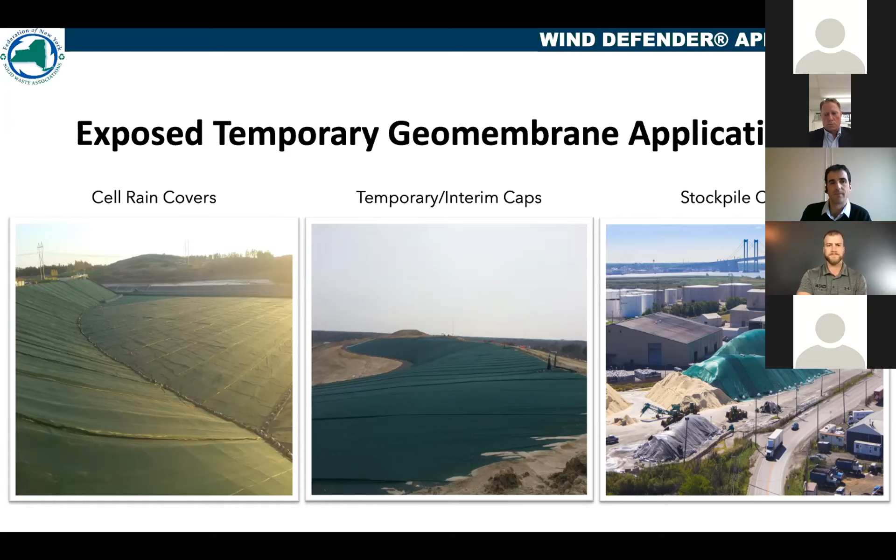So as Stefan said, these temporary covers, of course, we're here to focus on controlling odors, but they really have the same benefits as a final closure system. You're essentially eliminating the leachate production by shedding all the rainwater off and controlling erosion and reducing site maintenance.

And as Stefan said, the biggest issue with any of these exposed covers is how are you going to ballast it? How are you going to protect your investment? After the traditional soil cover was used, the rope and sandbag system is probably one of the most widely used methods. As you can see in the photo on the screen here, the rope and sandbag system is still in place there, but you're still seeing damage occurring to the membrane just due to wind whip and suction effect over time, and then the liner will essentially get a hole in it and air gets underneath there, and then you're in trouble.

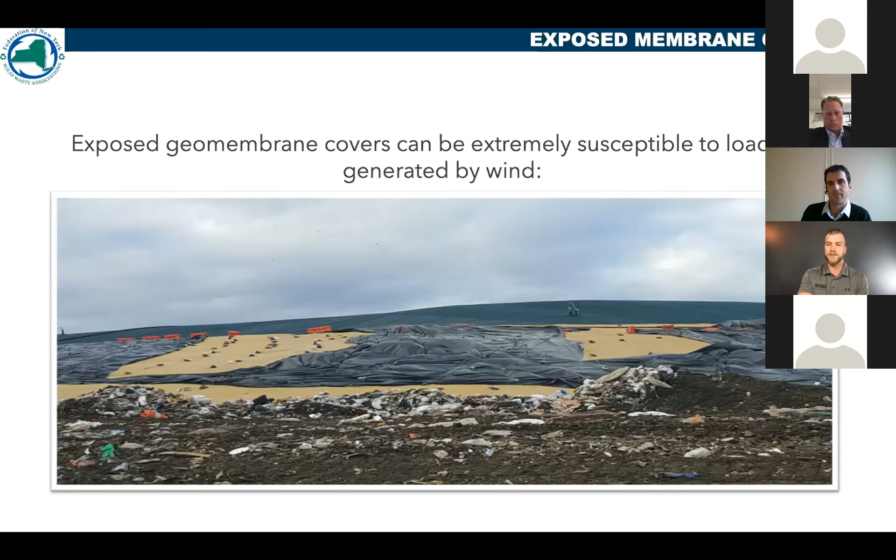Some of the other traditional ballast methods out there, other than sandbags, include tires, soil windrows you could place on your lining system, and ground anchors. A lot of these systems have drawbacks though - tires aren't available to everybody, soil isn't always readily available on site, and it's a pain to place on top of your liner system. As for ground anchors, I've heard positives, but a lot of people get nervous punching holes through the liner that's supposed to be protecting against infiltration in the first place.

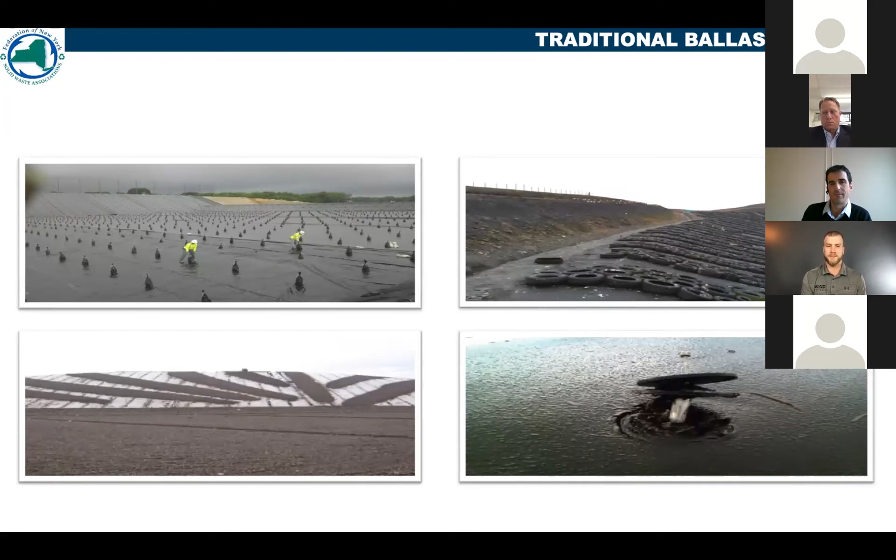So as I said, the most popular method is probably the rope and sandbag system. As you can see on the left, we're having some snow loading occur on this system. Essentially what happens is the snow load builds up on those sandbags and causes the rope lines to fail.

Makes sense. Another neat fact, safety-wise, versus our Wind Defender product - a roll of Wind Defender is roughly 325 pounds and can cover an area of about 6,500 square feet. If you were going to do the same scenario with a 5x10 rope and sandbag grid, those installers have to carry out roughly 4,000 pounds of sandbags just to cover that same area that a roll of Wind Defender would cover.

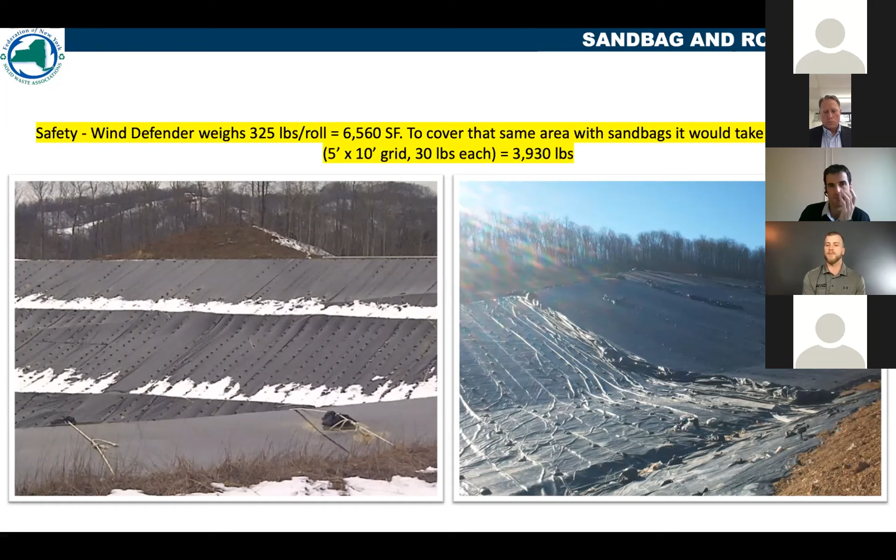But really the biggest thing is first understanding what we have to control. There are two main forces you have to control or battle when it comes to ballasting a membrane: crosswinds, and wind uplift or negative pressure.

So the traditional methods have always used the approach of putting enough weight on it, enough point loading on it, so it'll hold the liner down and stop it from blowing away.

You can see on the photo on the left, this is a site in Tennessee, and it's the only site I've ever seen with that many sandbags used to ballast the membrane. Those sandbags were spaced about 2 feet apart, and I feel very badly for the installers who had to put those in. We actually went out to that site and installed a 7-acre section right next to that area with Wind Defender and a 40 mil micro spike liner by Agru.

It was kind of a neat site - the area to the left was 7 acres, and the area to the right of that was 7 acres of Wind Defender and 40 mil. The goal of the site was to prolong having to do the final closure system until they procured enough funds.

So they were able to break up their installation into multiple years. Year 1, they did 7 acres with sandbags. Year 2, they did 7 acres with Wind Defender. Then year 3, they came back - we were actually able to remove the Wind Defender and reuse it, and remove all the sandbags, and then cover it with the final closure system.

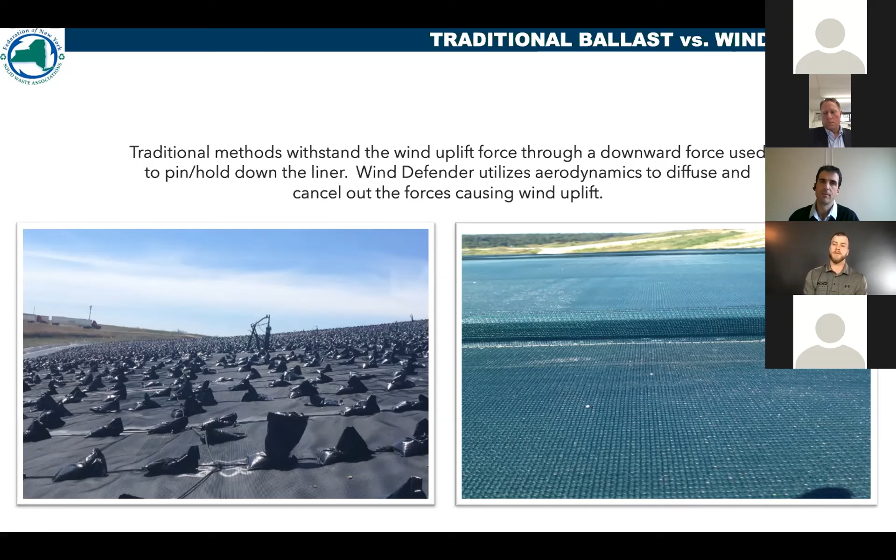So here's a short video. It demonstrates how the Wind Defender works. I know a lot of people always ask how does it work - it's not heavy.

So you see, this is basically depicting what's happening on every landfill out there. The flow of air is coming across the top of the slope, and it creates that suction effect or negative pressure, which is usually greatest towards the top of your slope. That'll draw the membrane up and off the subgrade.

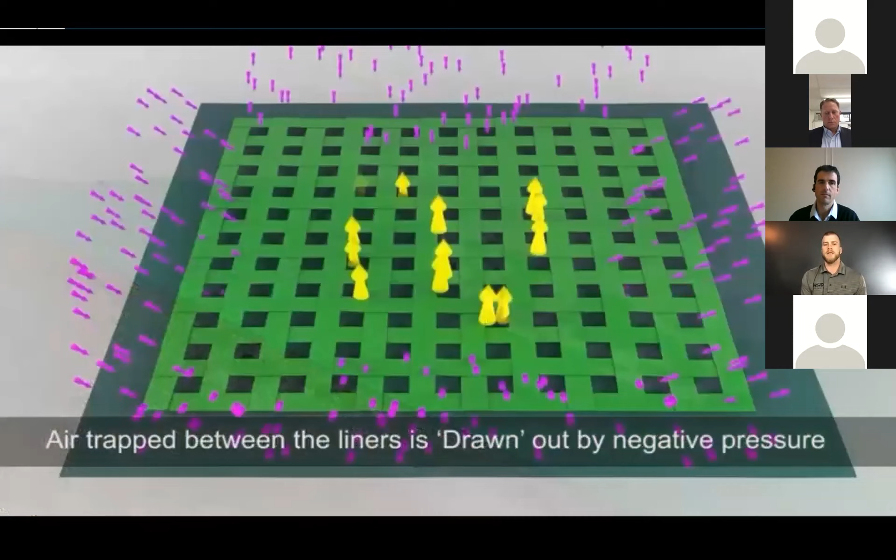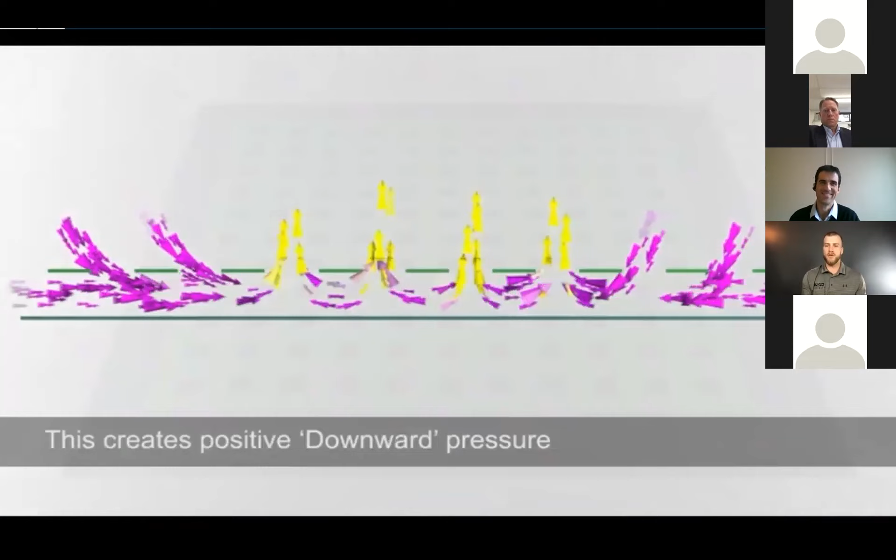So when Wind Defender is applied, it's essentially diffusing that uplift force. You can see with our high-tech picture and video here, as the air is being drawn up from the membrane, it's actually being replaced with a downward force of air to cancel out that uplift force.

The material itself is knitted UV stabilized HDPE geotextile, so the filament is high density polyethylene, knitted together. It comes shipped to your job site just like a roll of liner, except the material is C-folded. So it's a 20-foot wide by 328-foot long roll, but the 20 feet wide is folded in half, so you get a 10-foot wide roll. You unroll it and then unfold it to make 20 feet.

And the installation process is pretty simple. You'll deploy about 2 or 3 panels, seam them together, and then line your crew up on the leading edge of material and actually tension the system into place.

Sewing threads, I think, is often overlooked when it comes to seaming a lot of the geosynthetics in our industry. But typically a polyester thread is used. We recommend a minimum of a 277 polyester bonded thread, and I like to say use that type of thread for a less than 10-year service life. We have since, in the past couple of years, introduced a GeoFix thread, which is the only thread I've been able to find that comes with a limited lifetime warranty. We'll recommend that on a 10-year plus expected service life project.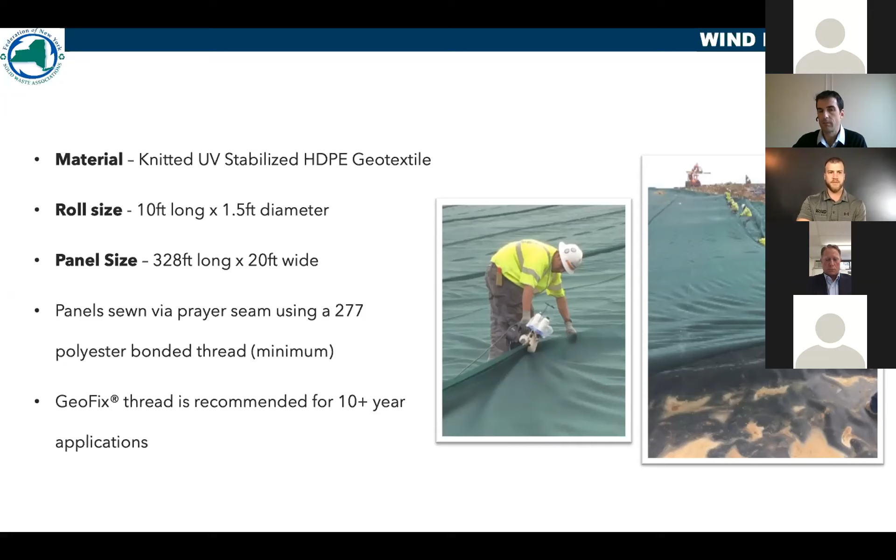Just a couple of typical details. I always like to show the one on the top right because oftentimes I get through this presentation and somebody will ask, well, there's holes in wind defender, how does that stop rainwater from infiltrating into my slope? It goes on top of the geomembrane, and just below the geomembrane we'll see Stefan's drain tube product to collect some surface gas. As I said, typical seams for the material is just a simple prayer seam. We like to see about 3 inches of material above that thread line for a proper seam.

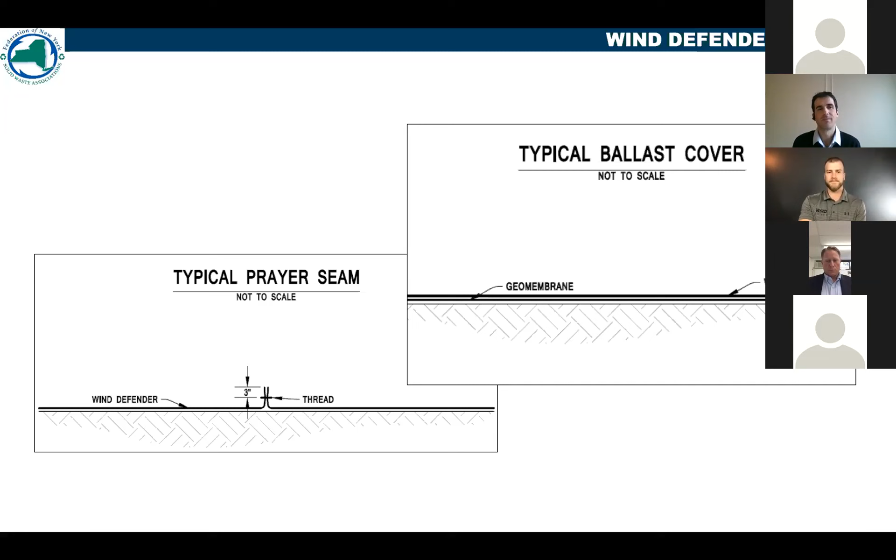Obviously, terminating the product around the perimeter, we'd always like to see it go in an anchor trench. We'll put it right on top of the geomembrane in a typical 2x2 anchor trench. Obviously this isn't possible everywhere. Oftentimes at the toe of slope, you might run your liner out into a swale or perimeter ditch. With the wind defender being in tension, we try to keep it out of those ditches, to keep it easy for you to clean out in the future, as well as prevent any kind of trampolining or bridging in the wind defender system.

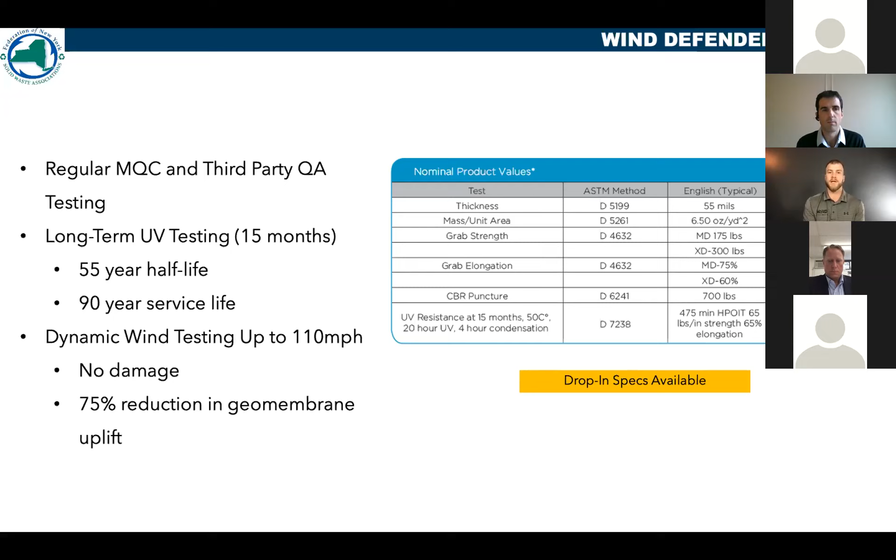When it comes to testing, pretty standard. We do manufacturer quality control as well as third-party quality assurance testing. We've done long-term accelerated UV testing for 15 months, and based on those results, our system has a half-life of 55 years and an expected service life of 90 years. Obviously that's in the lab, might be slightly different out in the field, but really great UV properties to our system, as well as some wind tunnel testing that we've done up to 110 miles an hour without any damage.

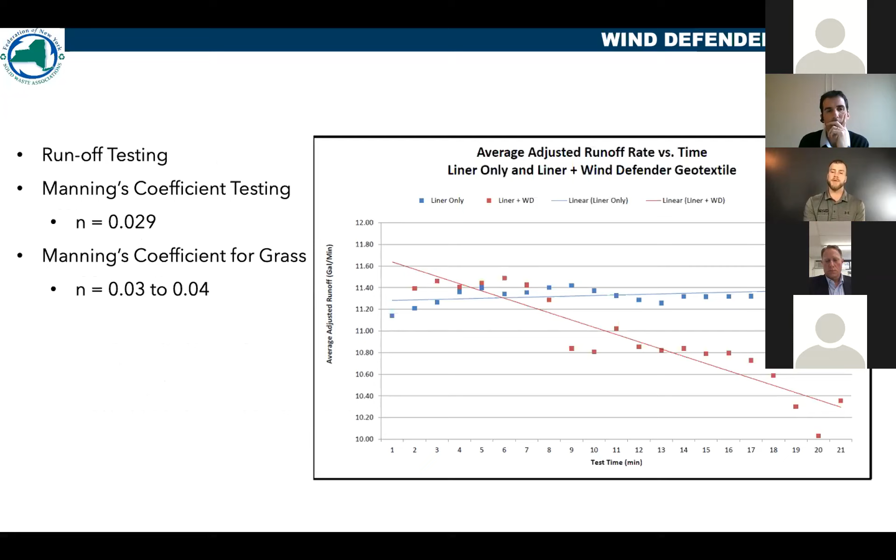In addition to that, many of the engineers were interested in some of the properties involving runoff. Everybody knows once it's raining on top of the membrane, you're getting 100% of the rain, basically. With the wind defender, we found that we have a Manning's coefficient very close to that of grass, so we do see some reduced flow rates with the wind defender system, just something to keep in mind when you're designing.

So here's a short video. It's one thing for me to tell you about the product, but it's another thing to actually see it. This is over top of a 40 mil liner. You can see on that side, wind defender is staying pretty still. And as you pan across the other side, you get a good glimpse of what a 40 mil unballasted membrane does in high winds. Kind of tough to see, but that bubble you're looking at is probably about 4 feet off of the ground, in a pretty windy day.

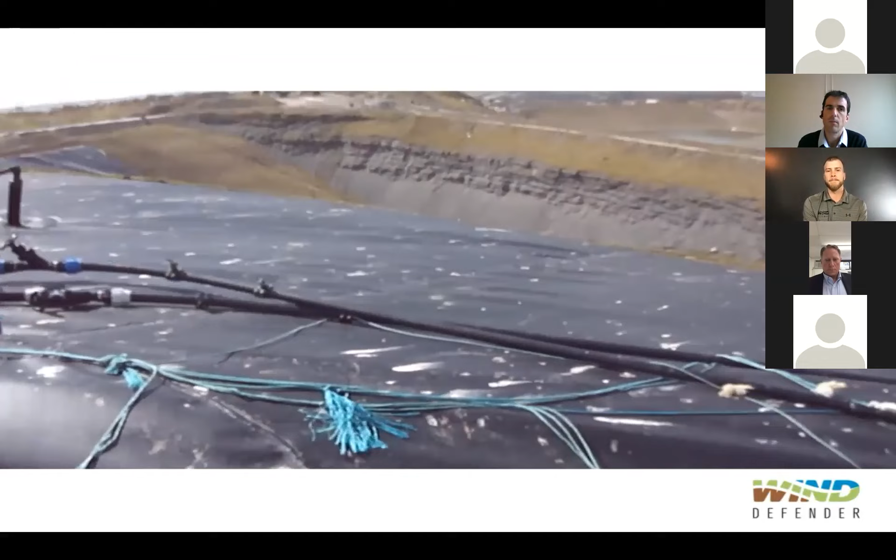And as I mentioned earlier, this is a photo and video from that installation where we were able to reuse the wind defender. In the picture to the left, you can see they took 3 panels wide at a time when they removed it and basically folded them in on each other. The installer here came up with a nifty idea to attach an auger attachment to the front of their skid steer with a piece of PVC pipe used as a core, and we were actually able to re-roll the material, as you can see the re-rolled rolls on the right.

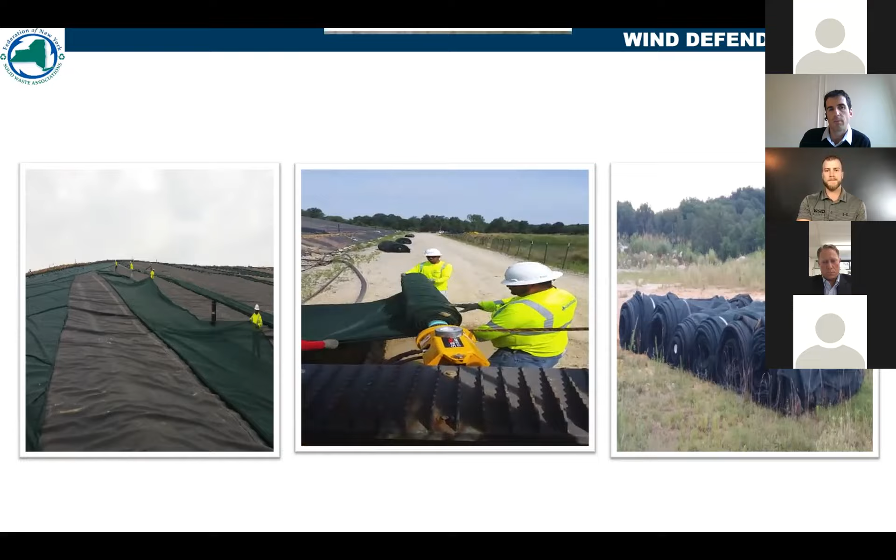So just a couple photos from some sites to see the transition over the past 6 years in business. One of our first installations was a 50,000 square foot temporary cap where they had your traditional rope and sandbag system, had some wind damage. We came back and repaired the rain cover as well as installed the wind defender.

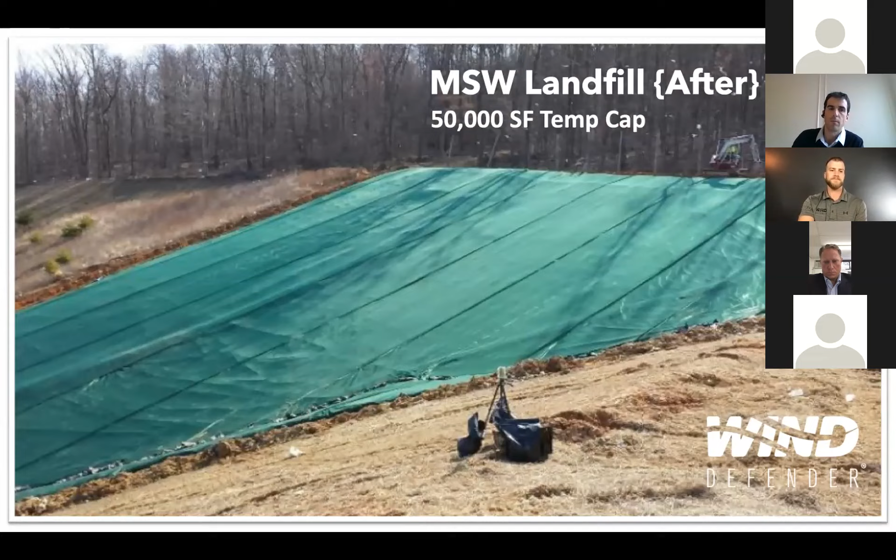Then in 2016, we saw one of our first, I would almost call it a complete capping job. This was about a 30-acre installation over top of 40 mil. One thing to note about this installation is around the entire perimeter where the wind defender is terminated, there is a perimeter swale that the liner runs through, but the wind defender is actually terminated just up the slope from that using the sandbag burrito method. So around this entire area, there is no anchor trench, it's all a sandbag burrito.

The only other thing holding it down or putting any other weight on it would be this access road constructed across the top of the landfill. And that project still is in service.

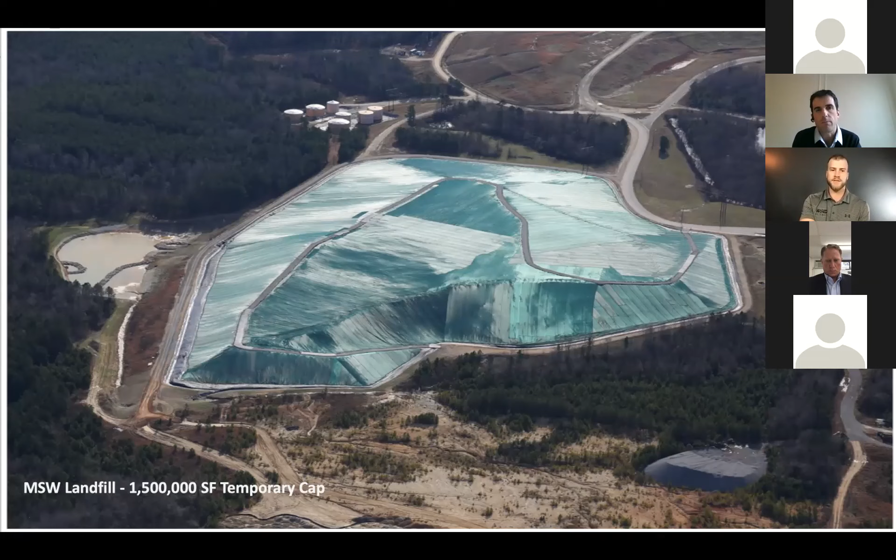One thing to note in this picture, you can see some color difference between these two areas. That's due to having the wind defender installed one direction and then flipped upside down, so there's a more tan appearance on one side versus a more green appearance on the other. So you have to pay attention when you install it to stay consistent with your color.

To date, we have over 84 million square feet installed across the US. We also have installations in Canada and Hawaii. Out of all those installations, we've had zero catastrophic failures and haven't had any blow-offs.

As far as maintenance is concerned, you might have some holes from animals that can be very easily patched up and sewn with a patch around it. The other thing you'll see is seam failure, either due to not enough overlap on the seam, and while the material is in tension, that seam tends to split apart. Again, not a very difficult fix, and not detrimental to your cover system. We can come right back in there and essentially sew another piece of wind defender into the split seam.

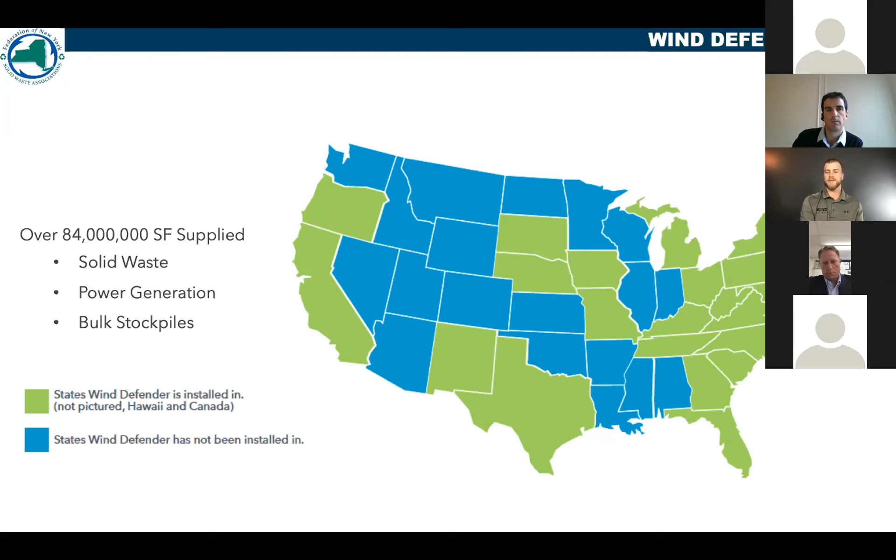So in conclusion, I'd say we've heard a lot about ways to control odor, from shorter term solutions to longer term solutions. I think with some of these new and innovative products, it's nice to see that the industry is still advancing and there are new things out there to consider and evaluate. I'm not going to tell you that the wind defender is the end all be all. If you have an installation that you know is only going to last 6 months, I wouldn't recommend using wind defender. It is slightly more of a premium product versus your rope and sandbag system.

And I'm sure Bill might ask me this question, so I'll answer it right now. You're looking at roughly about 17 cents per square foot material cost, and then 12 cents a square foot as an installation cost for placing the wind defender.

So I guess I'll open it up for any questions anybody has.